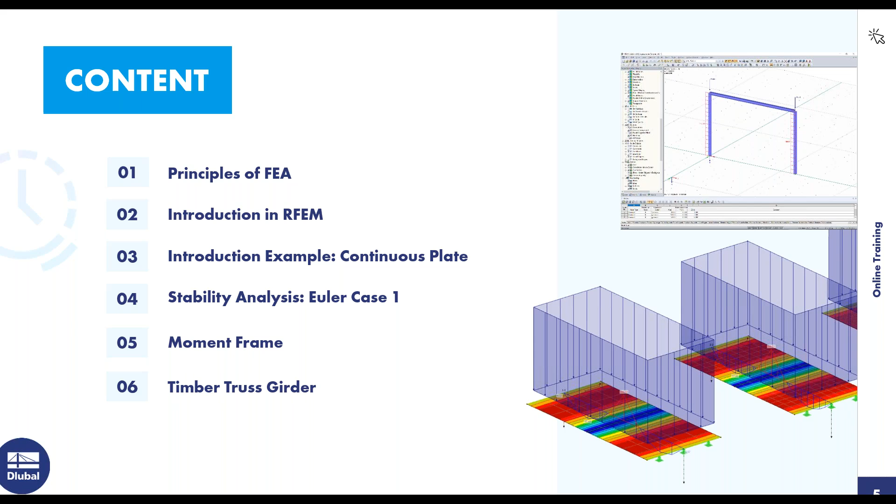With that said, we can jump into going over the basics of FEA. When using computer software, it's based on the displacement method, and another method you may be aware of is the force method, where the unknown is the force, and the internal forces can be calculated based off of this. With the displacement method, the unknown is displacement, and to solve for this, the displacement vectors must be calculated, and then the internal forces and support reactions can be figured out.

The main problem today is that analytical solutions can be difficult to determine when it comes to large, complicated structures. Doing hand calculations for some structures with complicated and odd geometry can almost feel impossible, and the limits are being reached with large, complicated structures, so it's difficult to get accurate results.

This is where FEA software comes in. Structures, especially complicated ones, are modeled and converted into a finite interconnected element mesh. The material and cross-section properties are given at each FE node, and then the mechanical behavior is transferred between these elements.

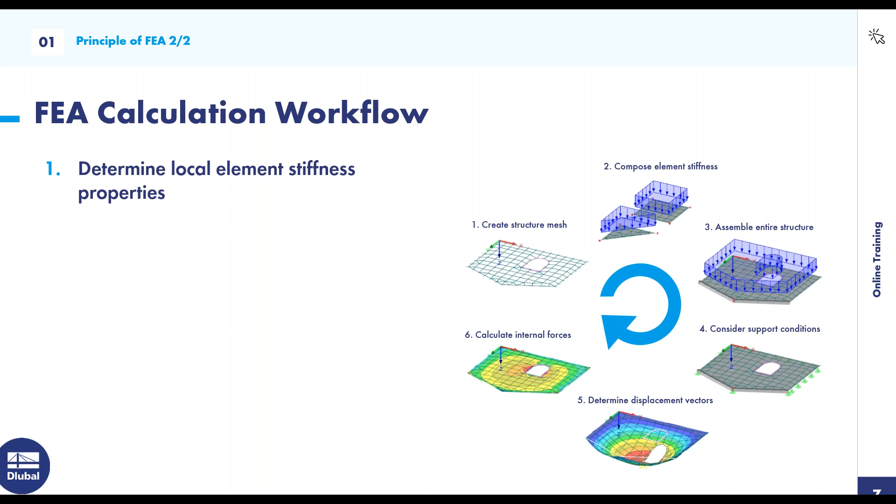Next I want to go over the FEA calculation workflow, which is also good to know for most FEA software. First, the local element stiffness properties are determined. Then those local stiffness properties are transferred to the global coordinate system, and the assembly of the entire structure takes place. The boundary conditions or supports are then defined, which could consist of sliding, rigid, or hinged. Then the displacement vectors can be calculated by solving the system of equations, and lastly the support forces and internal forces can be determined.

So the first question for today will be: what is discretization? It should be pretty easy since I just went over it, but here are the options. Choose from A to C and enter your answer in the chat, and we'll see if the majority got it correct, then go over it.

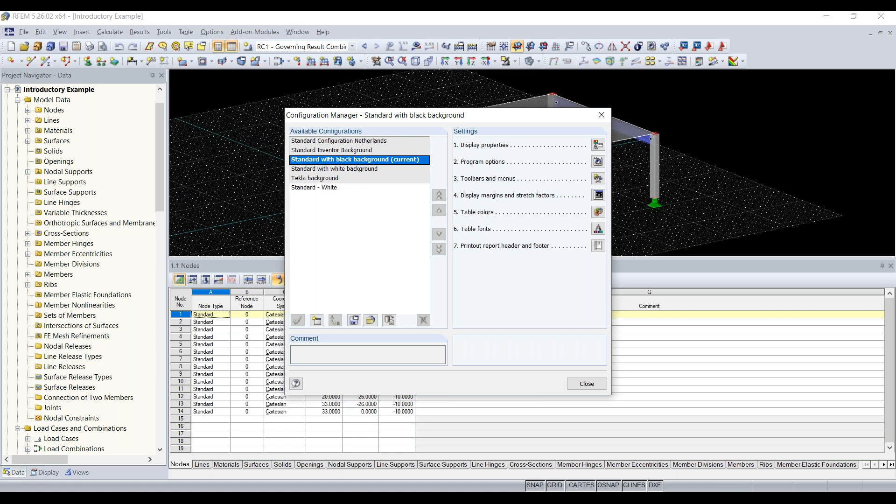Also, you can change the background color. If we wanted a black background, we could go to options, then the configuration manager, and we can change our background to black if we'd like, along with some other options as well. I'm going to keep mine white.

Then we also have the insert menu up here, which organizes all of the tools. If you wanted to insert nodes, lines, materials, or members, this is all organized in this tool table drop-down window. That's helpful if you don't want to use the tools up in your toolbar, which is the next thing to go over.

Here is all of your basic tools that you need to go through and model your model. If your toolbar doesn't look like this, you can rearrange your tools, but if you want that done automatically, you can right click anywhere in this gray space and hit reset to default, and that'll reset your toolbar to look like mine. I think this is the best layout—everything's organized where it should be, and I think it's helpful.

We can also change the view of our model using these buttons to view in the X direction, Y direction, or Z direction. There's also additional options for reverse directions as well, and you can hit this button to set it back to isometric view.

In the project navigator, if you scroll down, you have a folder for your add-on modules, and RFEM is great for checking and analyzing basic results such as deformations, internal forces, and support reactions. But if you want to get into designing specific materials such as steel, concrete, and timber, according to a standard, this is where you would choose an add-on module to do that.

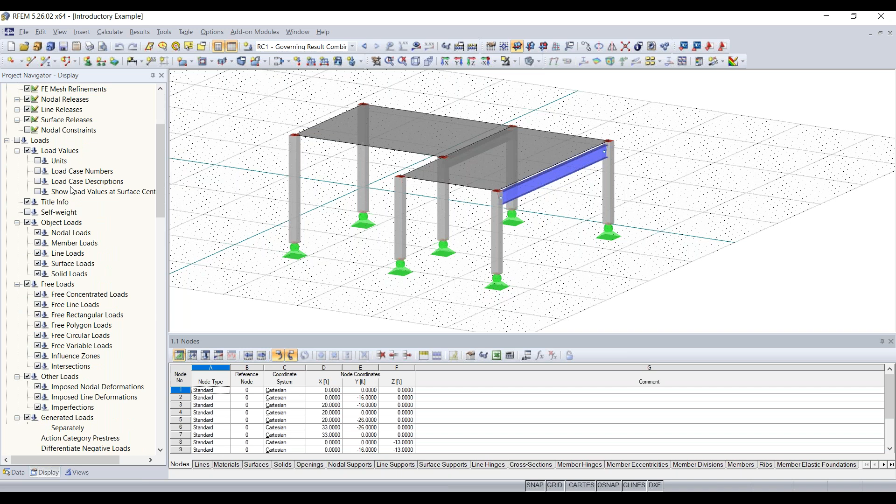We'll go over those more in depth later on, but the next tab down here in our project navigator is the display tab, and this allows you to turn off aspects in the graphical window. So if you wanted to turn off something like surfaces, this just turns off the display, it doesn't actually get rid of the surface. So these surfaces are still there, just not displayed. You can turn things on and off in here, and manipulate results and things. We'll go over this also more in detail later.

And then we have our views tab. Here we can set visibilities, and we can view things based on members by cross section. So if I only wanted to view my W18 by 50 cross sections in my model, I could do that, and you can see it grays out the whole rest of the model here, and I can easily point out my certain cross section there.

And then the fourth tab, which you can't see right now, is the results tab. So if I go up here and hit show results, and I turn off my visibilities, now we have the fourth tab here, results tab, and this is how we can choose which results we would like to show on our model. So right now I could show just my global deformations, and now you can see the global deformations graphically as well.

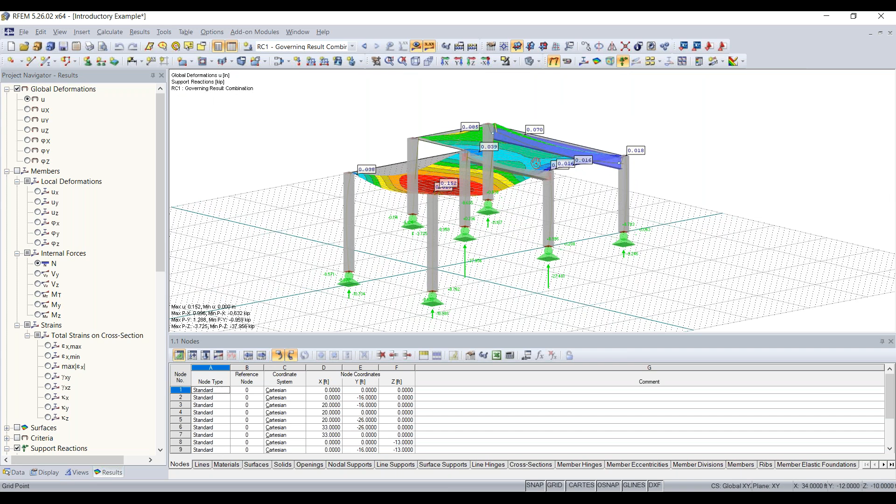So we'll go over how to view results and how to use this efficiently within the upcoming examples. Last thing to go over is just movement. So if you have a mouse with a scroll wheel, you can press in the scroll wheel and move in your model in translation. You can also use the scroll wheel to zoom in and out. And then if you hold Control and press in the scroll wheel, you can rotate your model. So those are the basic movements.

If you don't have a mouse and you're using a trackpad, you can use the keyboard arrow keys to move around. You can also hold Control and use the arrow keys to rotate. And then you can hit the plus and minus buttons to zoom in and out.

So before we get into the continuous plate example, I just would like to pose one question: what is RFEM? So if everyone wants to answer, put your answer in the chat, and then we can go over the correct answer in a minute.

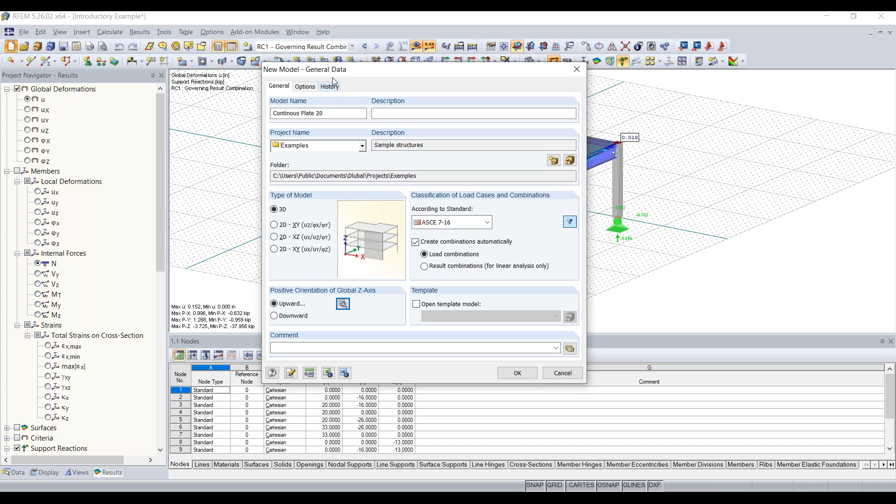So now that all of these options are chosen, we can click OK in our general data.

One other thing I'd like to mention is I'll be using imperial units for this example, but you can change between imperial and metric units pretty easily by going up to Options, then Units and Decimal Places.

If I wanted to switch from imperial units, I could open this up, and there's a button called Load Saved Profile. RFEM comes with two load saved profiles by default, metric and imperial. If I wanted to switch to metric, I would just double click on it, or if I wanted to set metric as my default, I would check off this box. For now, for this example, I'll be sticking with imperial, but just know you can switch back and forth pretty easily.

Now you can see we have our blank work window here. You can see our grid, which for imperial is 50 feet by 50 feet, and each one of these grid points is spaced one foot apart. You can go up to the settings of Work Plane / Grid to change any of these parameters. Under grid point spacing, the base and height is 1 foot, and in each direction there are 50 grid points. So my grid is 50 by 50, up in the second quadrant here.

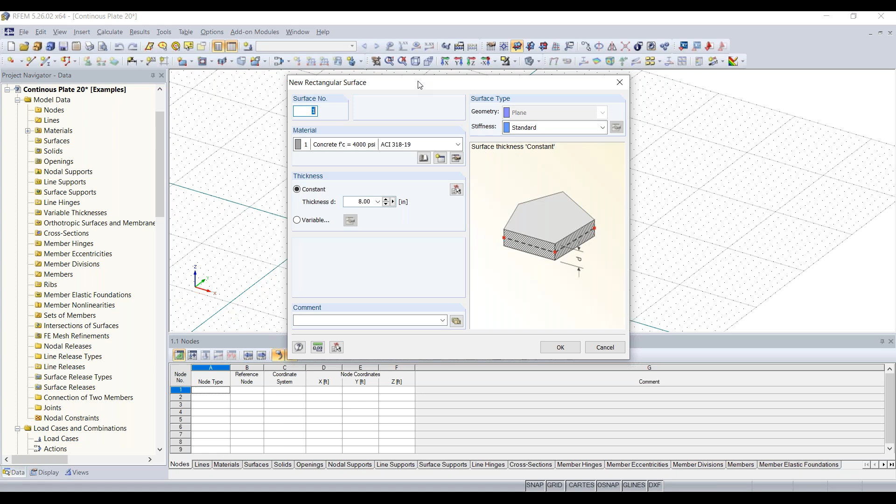So now the first thing we want to do is create one of our plates. To do that, there is a tool called New Rectangular Surface. If I click on that, this dialog box will pop up called New Rectangular Surface.

The first thing we want to do is create our material. I already have a material loaded in, but if you don't have this loaded in, you would want to create a new material. You can create your own custom material by entering the material constants, or we can choose a material from the material library that RFEM has built in.

I'll choose that, and the material library dialog box will pop up. On the left-hand side, you can filter to concrete, so for this example we'll be using concrete, then the material category. For this example, I'm going to use the ACI standard, but you can also choose from other standards to pick your material, such as the Canadian standard or Eurocode.

So I'll choose ACI, and then the 2019, the latest standard, and I want this to be 4,000 PSI concrete. At the bottom, you can also see your material constants or material properties if you'd like to check those. So I'll just hit OK.

Now the next thing we need to tell the program is what the thickness of this plate is going to be, and for this example we're going to make it 12 inches. Now everything else is basically entered, so we can click OK.

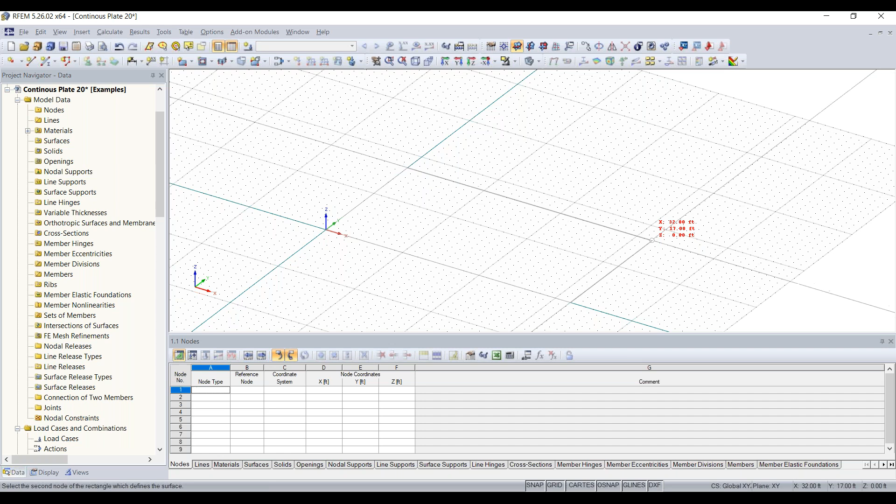You can see my cursor has turned into this reticle, so I can snap to any of these grid points to put down the first corner. The first corner is going to be located at the origin, so I'll left click on the origin, and then this plate's going to be 32 feet by 16 feet. I'll go 32, then up to 16, and click again. Now you can see our first plate has been created.

Now the next thing we can do is either just draw the same plate up at the top, or we can use the move and copy tool. I'll right click to cancel out of that tool, then highlight the whole plate. I can hold the control key down and left click to move this plate up, and I'm going to have these two plates spaced out by 5 feet.

The other option is the actual move and copy tool. If I highlight the second plate, then go up to this tool called Move and/or Copy, I can click on that and make one copy of this plate, and I want to move it in the Y direction 21 feet.

I'll click OK. Now you can see I created a second copy of the plate at 21 feet. The reason is because I wanted it spaced 5 feet from this plate here.

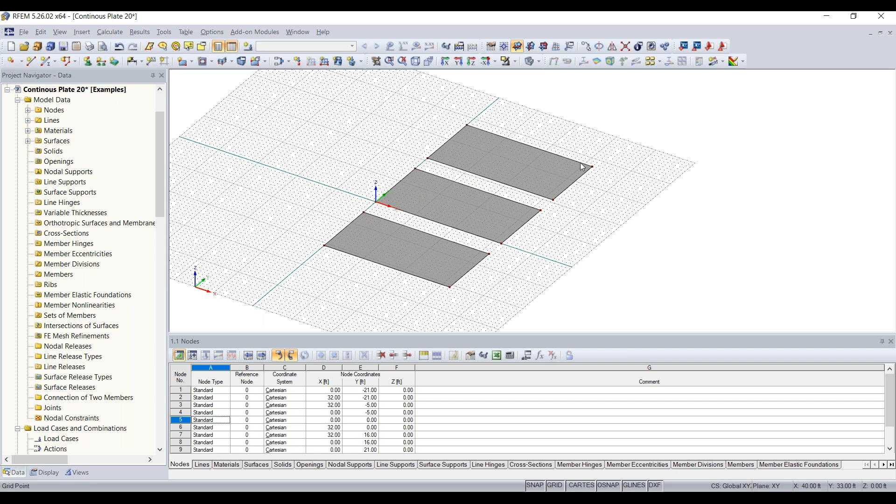So to create a continuous beam, we're going to go up here to new single member. In this new member dialog box, it looks a little similar to the one for surfaces, but it's a little more complex, as you can see.

What we want to do is tell the program what cross-section and material this member is going to be. You can see there's a member start and end—just focus on the member start, since the whole entire member will use this cross-section of material. We can click on this button here, create new cross-section.

You can enter the cross-section properties manually, just like the surface, or go up here to this button, import cross-section from library, which is what we want to do. So we'll click on that.

Now you can see we have our categories here in the cross-section library. We have our rolled cross-sections based on standardized rolled cross-sections, then our built-up sections, and then our parametric thin-walled sections.

You can change these dimensions or input them manually as you would like. Then we have parametric massive, which is what we're going to use for our concrete continuous beam, and then parametric timber, with standardized timber down here. I'll choose the rectangular section from our parametric massive category.

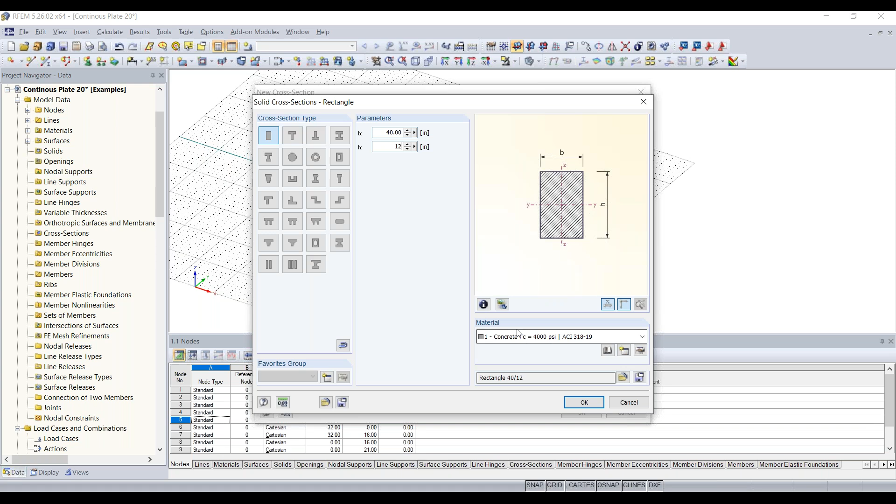The base of this is going to be 40 inches, and the height is going to be 12 inches—similar to, or exactly the same as, the thickness of our plates. The material we'll be using is the same as our plates, so 4,000 PSI concrete.

I'll click OK and click OK through all of these dialog boxes, and then I can start drawing my beam. I'm going to make this 5 feet away from the plate, like the other plates.

So I'll click for the member start, then click for the member end, and right click to cancel out. Now you can see we have our continuous beam here.

So now the next thing we want to do is divide these lines here, because we're going to add in some center supports to the midspan of our plates here. There are multiple ways of dividing lines in RFEM.

I can right click on this line, and my shortcuts menu will pop up, and I want to go to divide line. You can see there are 3 options for dividing a line. I can divide it graphically, which allows me to snap to a grid point, and I want to divide it directly in the middle at 16 feet. I could just keep going to the next lines to divide them.

But there are also a couple other options—I can divide them by an intermediate node. You can see here I can divide line by an intermediate node, and this will just divide it evenly. So if I just choose one node, it'll put a node directly in the center of that line.

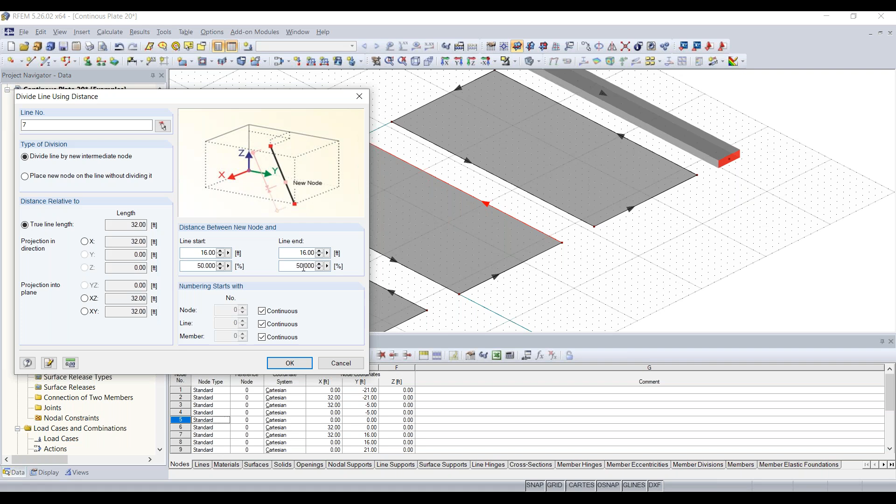And then the third option is you can do it by distance. So if you really want to get accurate on where this node is going to be, I can either do it 16 feet from the start, 16 feet from the end, or 50%, so it's in the middle. I can just hit OK.

Now it's going to put that node right in the middle. If you're ever confused about the direction you drew your lines, you can hover over them and there's an arrow telling you which way you drew your line.

This is helpful mostly for members, but also for lines if you're dividing them and not sure where the member start or end is. So I'll do the rest of these graphically, placing nodes right in the middle, then dividing my member using n intermediate nodes. We'll click OK, and now you can see my beam is divided into two sections.

Now we can add our supports. Actually, before we do that, we need to add in lines to connect these nodes. To draw a line, you can go up here to the tool called New Line, and then we can snap to our nodes that we placed here and simply go through and draw our lines.

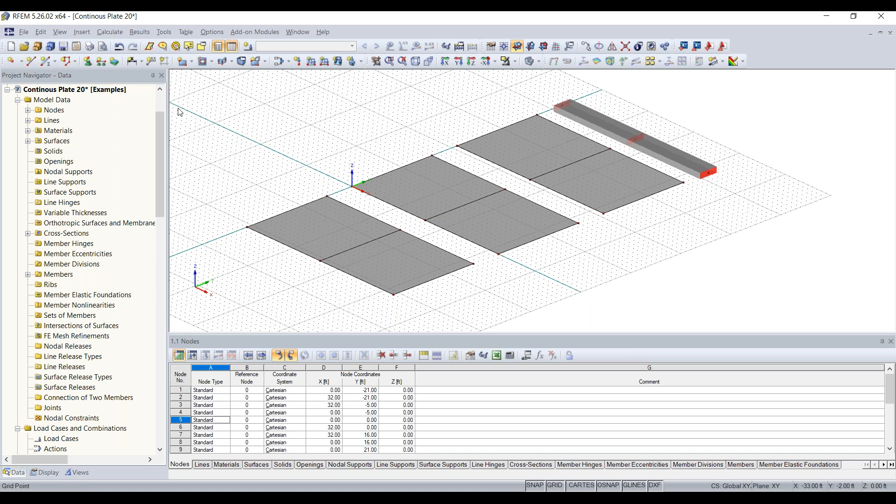Just like so, and now we can add our supports in. To create a new support, we go up here to new line support. We're going to support this center span continuously along this line, so we want to use a line support, and this line support is going to be hinged.

So nothing can move in translation, but all of the degrees of freedom for rotation are released. You can see we have templates, or already defined supports, but if you wanted to create your own custom definition, you can create a new support here, and then check or uncheck one of the degrees of freedom.

All three of these are in translation, and then we have rotation. For a hinge support, we would just check and fix all of our translation directions, and then uncheck and release all of our rotation degrees there. We'll click OK, click OK again, and now we can just select all three of our lines here.

And this is going to actually be the same for our outside surface, right there. Now we just need to support our beam here, and this is going to be supported using nodal supports.

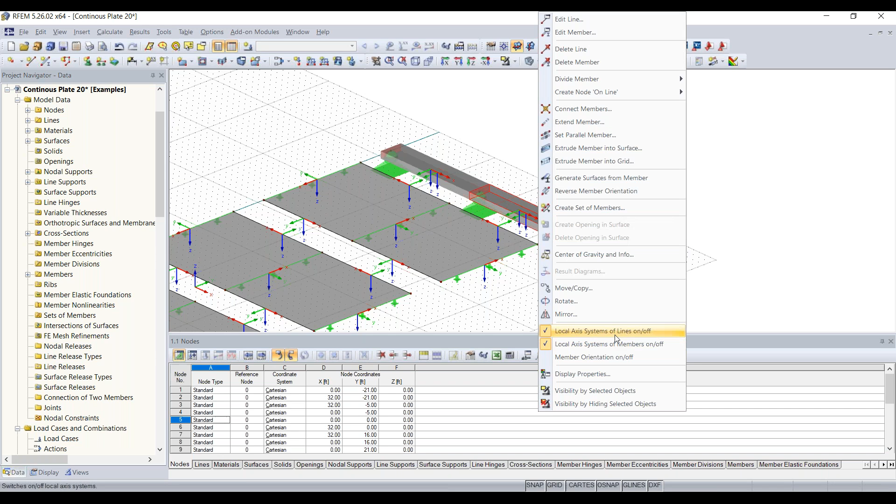So if I right click, we can show the local axis system of this beam, and that'll show the local axis system of all of the lines there. So actually I'll turn that off. Here's the local axis system of the member.

What we need to do is, if we put a third hinge support here, then the member would be able to infinitely rotate about its x-axis, and that would cause instability in the program.

So what we want to do is go up here and click on new nodal support, and create a new type of nodal support. We want to fix the rotation about the x-axis, keeping the member from rotating about it infinitely in the program. Now you can see the difference between the support with the fixed X rotation

and these two hinge supports that have it released. So now that we have all of our plates here and our beam here fixed, we can now get into loading.

Before we can add in any loading, it's important that we create a load case, because every load needs to be assigned to a load case within the program. So we go up here to this button, new load case, and this will open up our edit load case, and load cases and combinations dialog box, and you can see a load case has already been created.

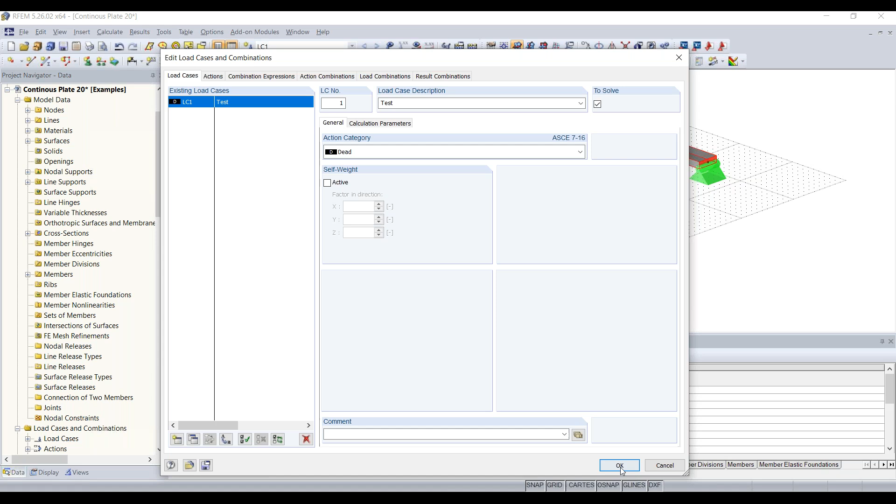We also want to note that self-weight for the dead load action category is automatically checked, so this will take self-weight into account for your model. We want to uncheck that for this example, and we'll click OK. Now you can see we're looking at our load case here, test. Any loading we add right now will be added underneath this test load case.

So now we want to create some surface loads to apply to our plates here, so we're going to go up here to the tool called new surface load.

This is the new surface load dialog box, and we want it to be a force. You can see there's multiple different load types here, load distributions. We want it to be uniform, and then we want it to act in the global Z direction for our load direction, so it'll be acting downwards. Now we just need to specify a magnitude.

For this magnitude, we need to add a negative sign, and it's going to be 210 pounds per square foot, so that'll be 0.21 KSF. Then we can click OK, and now we can just select our surfaces here and apply that loading to our surfaces. Now we can't apply that to our beam here because this is a member and not a surface.

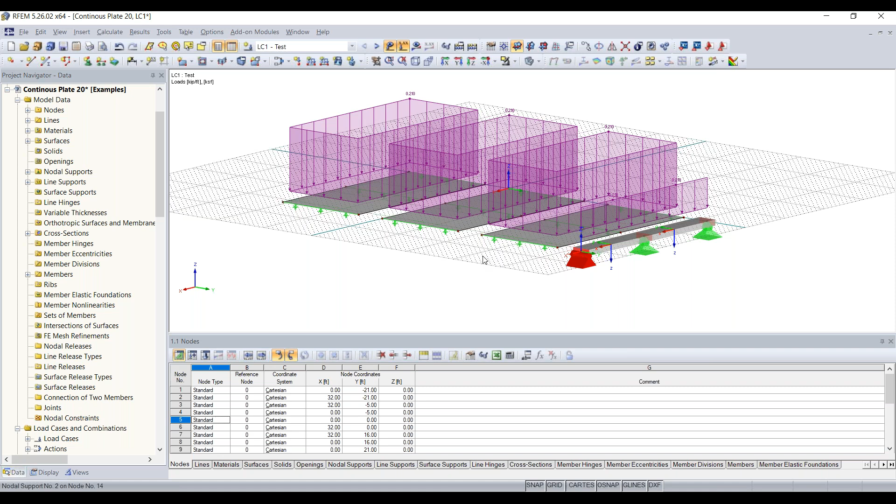Next thing we want to do is, for example purposes, create some FE mesh refinements. For now, I'm just going to unshow the loading on our model just to get a better look. To add in FE mesh refinements, we can simply right click on one of our surfaces, and there's an option here called FE mesh refinement. We want to go to new, and now we just need to create a new FE mesh refinement definition. What this does is it just allows us to specify an FE length

for a specific surface. So for this plate, we want the element length to be 0.2. We'll click OK and click OK again. And then you'll see this symbol here applied to the surface, saying that there's an FE mesh refinement here. So the whole entire surface will have an FE mesh length of 0.2 feet.

Then we're going to do kind of the same thing for this next surface. We'll right click on it, go to FE mesh refinement, and then go to new. You can see that definition I made earlier of 0.2 feet was saved, but we want to create a new definition again, and this one is going to be 0.4 feet.

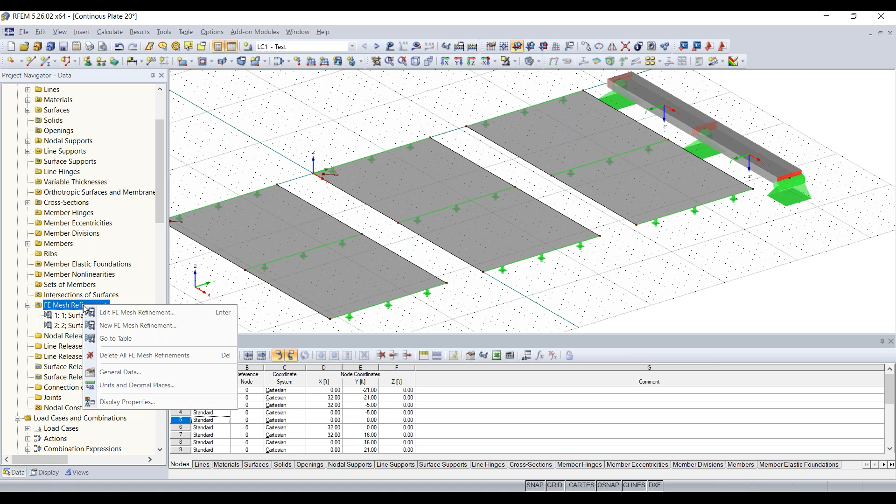Then we're going to do the exact same thing for the third one. We can also go to the project navigator, and you can see now the FE mesh refinements folder has a plus sign next to it, saying that we have some FE mesh refinements in our model. What we could do is just right click on this folder and then click on new FE mesh refinement. This third one is going to be 0.6 feet.

So you might be catching on to the reason of doing this. I've got to specify the surface up here so we can do that graphically. So I'll select that surface. What this is going to do is allow us to see the difference in results depending on the size of your FE mesh. That'll be interesting once we run our results.

Next thing we want to do is create some section cuts for our plates here. This will also just allow us to be able to view the results of the section cut right through our plate. So to create a section cut, we can go up here to Define Section and Results Diagram, and we can go to Create Section Numerically. Then the section name, I'm just going to name this one AA, and we need to choose where point A and point B of our cut will be.

We can use this button here, select edge points of the section. So I can snap to the center point of this line here, and then snap to the center point of this other side. So this will be point B.

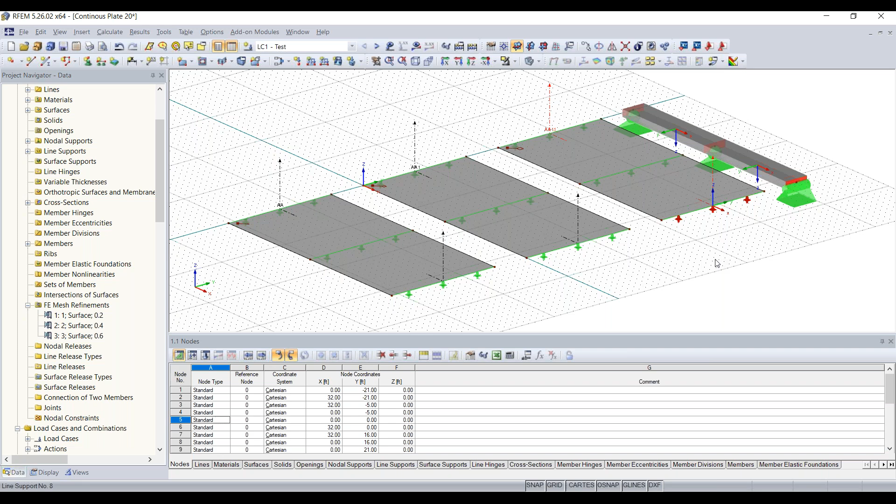You can snap to that center point again, select it again, hold Control, and then left click. And now we have section cuts on all three of our plates.

And you can see the names are a little awkward. So what we can do is go over here to the project navigator and then go to our folders and look for sections. We can expand that and double click on our section cuts here and just easily edit the name real quick. You can do that for the last one. Click OK. And now we have our section cuts.

And then now we're all ready to run our calculation. So we can either just hit show results to see the results for our LC1 here. But if we wanted to run the results for all of our load cases and combinations and everything, we can just go over here to this button called Calculate All. And what this will do is just run through the calculations, and it should be ready pretty quickly for this model.

So now you can see we have our global deformations now shown on our plates and also our beam here. Right now, it's just a yellow line showing the deformations for the beam.

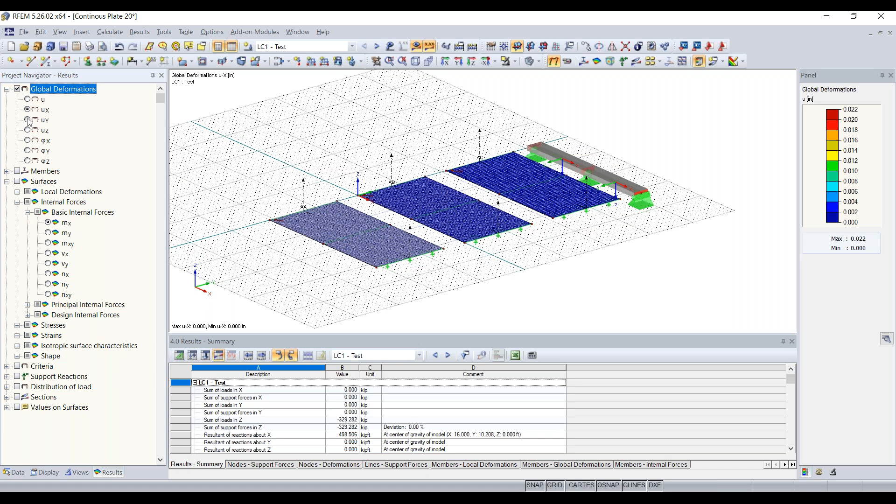And then you can see now we're in our results tab on our project navigator. So this is where we can choose what results we want to show. So right now I have global deformations checked, and that's the resultant. You can also take a look at the components in the X, Y, and Z directions as well. Right now we're getting a max deformation of 0.02 inches, so pretty minimal.

And the next thing we can look at is, for example, the internal forces of our beam here. So we'll check on that. And right now we're looking at our bending moments about the y-axis, local y-axis. So you can see that moment diagram displayed on our beam here.

I can change the rendering of our model from a solid transparent display to a wireframe view, so you can see that basically members in RFEM are just 1D member elements. So the rendering makes it look like they're 2D elements, but really they're just 1D elements in the background. But now you can get a better look at that bending moment diagram.

So we're getting a max bending moment of negative 6.7 kip feet there.

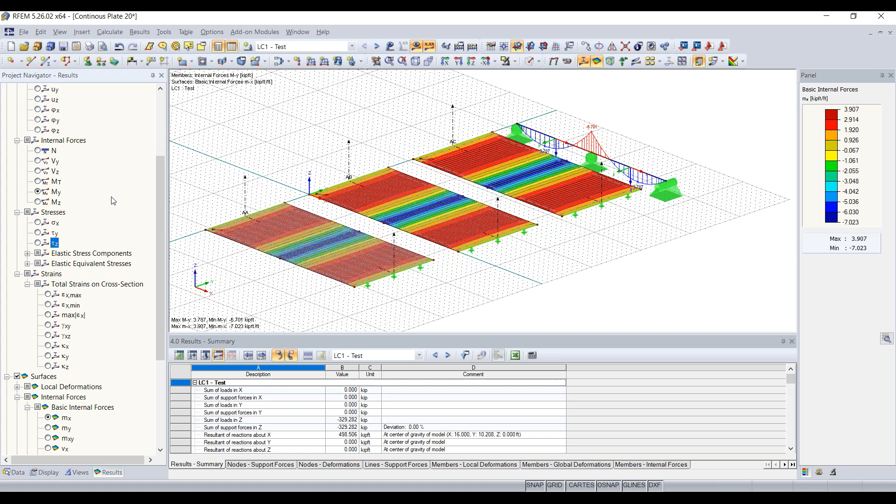Then we can also take a look at our internal forces on our plates. So if we scroll down here to check on surfaces, right now we're looking at our bending moments along the local x-axis. So every element, like I said, has a local x-axis, and this is what the lowercase x means. If you see a lowercase letter next to the symbol, that's telling you that it's using the local axes of the plate.

So if I right click on my surface, which is easier if I change this to a different one, there we go. I can go to the local axis system, and now you can see what that looks like on our plates.

And so in order to see the results better, I can also activate those on our plates. I can activate my section cuts. So if I scroll down here in the results tab, still in the results tab, everything's just expanded. But you can see we have sections now, and I can activate those.

And now you can see the results for our moments better, just with moment diagrams, basically through that section cut on our plates here. And maybe now you can also see the difference in accuracy between our plates here, depending on the FE mesh size we chose. So this first one was 0.2, and then we increased the length between all of them. So that's showing you how the results and accuracy can change.

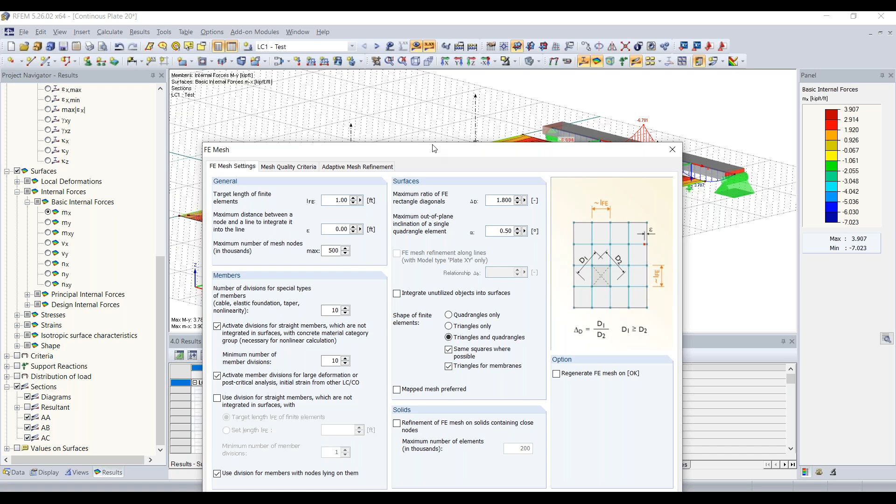Now's a good time to mention that the size you pick for your FE mesh does affect your results. If we go to calculate, then FE mesh settings, this option here, target length of finite elements, is your global FE mesh. If we didn't add refinements to these plates, 1 foot would have been the mesh size, which would have probably been too big for these plates. You can see how the results can change depending on the mesh size you choose.

Next thing I want to show you is if we go again to calculate, and then go to calculate parameters, calculation parameters.

Another topic is shear stiffness. First, I want to show you how you can deactivate the shear stiffness of your members with this option. Right now, by default, shear stiffness is activated for members, but if I uncheck this, it won't be. This is important because if you're trying to compare hand calculations to RFEM, RFEM is always running the calculations with shear stiffness considered.

Once I uncheck this and click OK, it's going to tell me I need to rerun my results because this option will change them. I'll click no real quick just to show you, but right now our max bending moment is 6.701 kip feet, so we'll see it shouldn't change too much. If I hit OK, delete the results, and rerun them, you'll see some change in results. We were at 6.701, and now our bending moment increased a little to 6.72. Nothing too large, but this is important to keep in mind if you're comparing hand calcs.

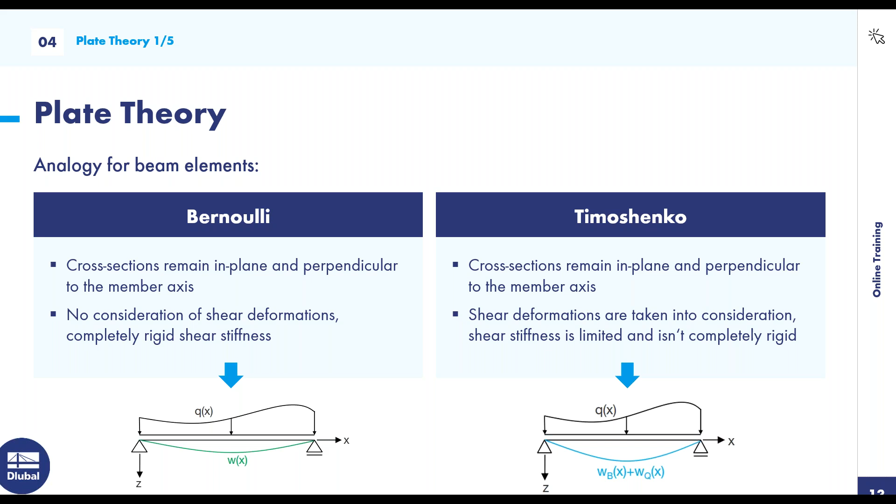You can see here that the deformation for Bernoulli's looks like this and is perpendicular to the member axes, whereas with the Timoshenko theory, we have an additional angle. This leads to additional deformations, due to the shear deformations taking into account that the shear stiffness is not completely rigid and changes.

Now, knowing these two theories, we can apply the same idea to our plate elements, or plate theory. A similar theory to Bernoulli's for plate theory is Kirchhoff's theory, and similar to the Timoshenko theory is the Reissner-Mindlin theory, which works the same way for plates.

The assumptions for the Kirchhoff theory are listed here. We're assuming small deformations that are linear. We're also assuming the material used is linear elastic, using Hooke's law. We're assuming the cross sections remain flat with no warping, and that the plate has constant thickness. The major assumption is that there's no consideration of shear deformations.

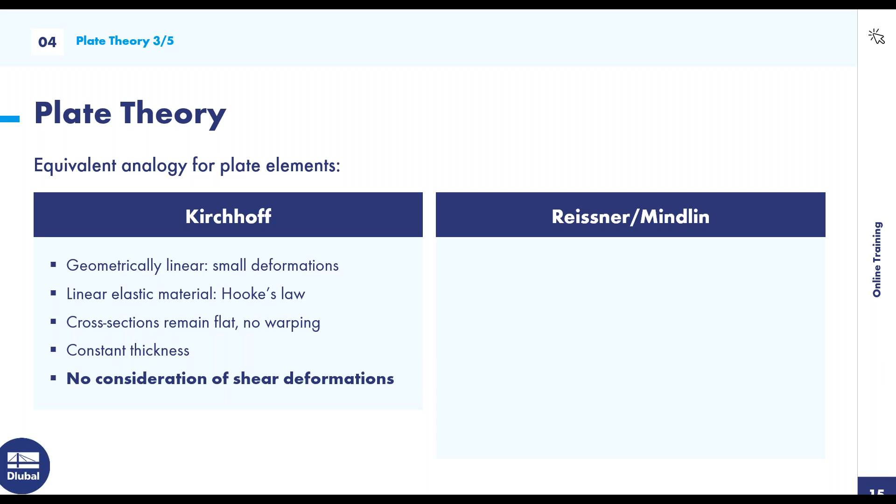For the Reissner-Mindlin theory, we assume all of the same assumptions, except that shear deformations are considered, and we're also taking into consideration transverse/lateral strains.

So again, we have our two plate theories, the Kirchhoff theory and the Reissner-Mindlin theory. Just to summarize, the Kirchhoff theory has great results when using thin plates. For example, concrete slabs work great. Again, no consideration of shear deformations, and keep in mind that this theory only considers a pure bending loading bearing capacity. So this is just more of a simplified approach. Keep that in mind when using the Kirchhoff theory.

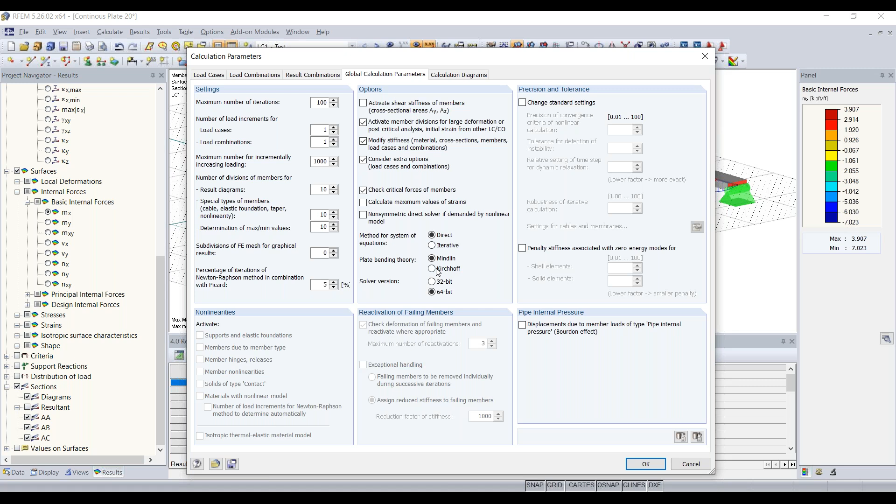So now we have our plates here, and if we go up here to calculate and we go to calculation parameters, you will see under calculation parameters that we have our plate bending theories down here. By default, RFEM uses the Reissner-Mindlin theory, which, like I said, works great for both thin and thick plates and just produces more accurate results. So if you wanted to use the Kirchhoff theory, you can switch to that.

So if we switch to that, right now you can hopefully see these results. So about 6.592, we'll just keep an eye on this one, 6.594. If we change this and we click OK, it's going to ask us to recalculate. If we run this calculation again, we should see that our bending moments will increase from the decreased deformation. So yep, 6.6. It was about 6.59. So not much change in results, but still just increased accurate results there with the Reissner-Mindlin theory.

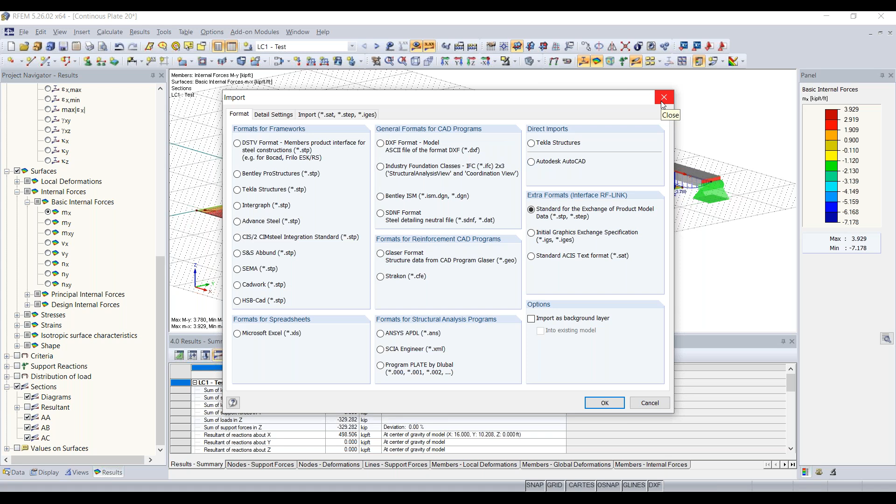The only other question I'll reiterate is the topic of setting the local z-axis down - it was asked why we need to do this. For local axes, you can have it set to upward, but we always recommend setting it to downward because this is how some of our add-on modules work. For example, the concrete module is mostly designed and based on having the local z-axis set to downward. When you set it upward for modules like the concrete module, your results could look inaccurate. So having this set to downward is important.

I also mentioned in the questions dialog box that this will be addressed in a future version of RFEM where this will no longer be an issue - you'll be able to use either the local axis Z up or down.

A few more questions that came in. Does RFEM produce shop drawings? The answer is no. It is purely for structural analysis only. It does not produce any drawings meant for fabricators.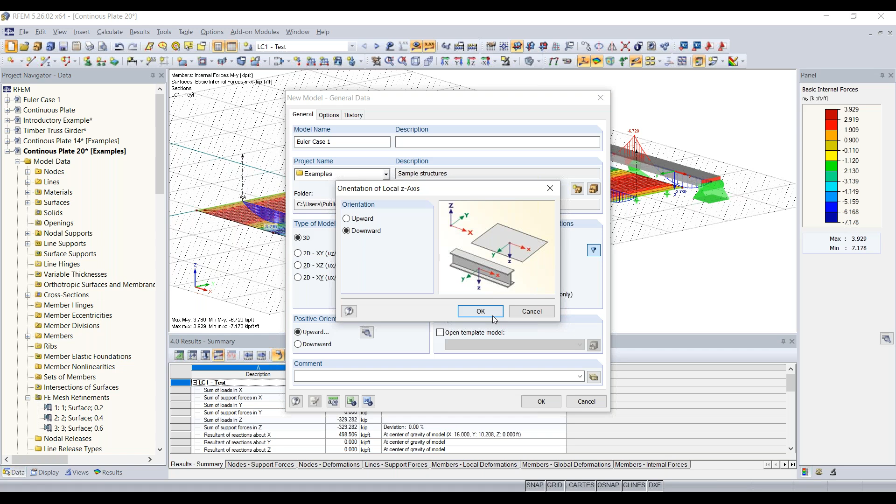Now for this example, we'll be creating a new model. We'll go up here to new model, and the name of this will be Euler case 1. Everything else will stay the same, it's going to be a 3D model. We'll just keep our load cases and combinations created automatically. Everything is set, so we'll hit OK.

So now again, we have our blank grid here. The first thing we want to do is create a new cross section, so we can go up here to new single member. We'll use the cross section library, and this is going to be a W shape. We'll filter to the AISC and the manufacturer, then choose W shape, and this is going to be a W shape 12 by 35.

We'll scroll down here to 12 by 35. We don't want it made out of concrete, so we can go to import material from material library. It'll be metal, steel, and we'll use the ASTM for this example, and we'll just make it steel A992. Click OK, and then click OK again, and click OK one more time.

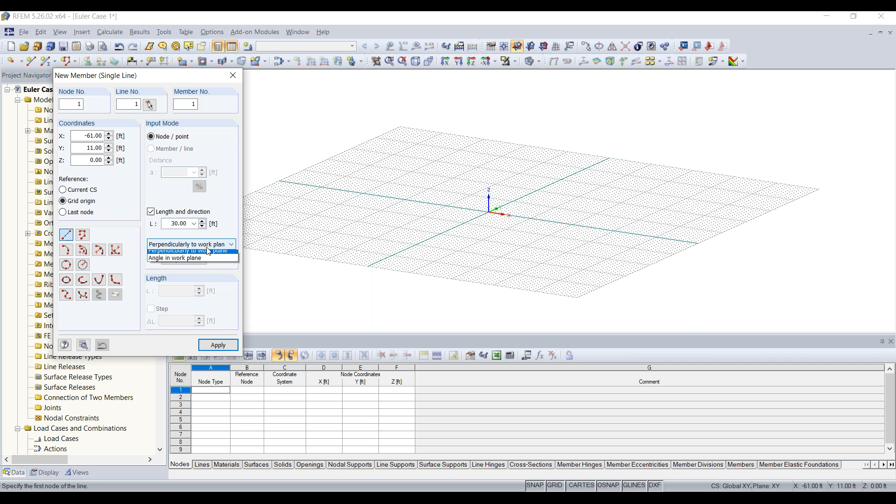This is going to be a 30-foot tall column, and we basically want to draw this member perpendicular to our plane here. So a couple options for that. We can either choose the option in this tool here, length and direction, type in 30 feet and select perpendicular to work plane in the positive direction. Now I can just draw this, select the origin here, and the program will draw that member 30 feet perpendicular to our grid. The other option would have been

to change our work plane. We can do that up here with these three options. Right now the work plane is in the XY plane, but we could have drawn our member up the plane there, and you can see again it's 30 feet tall. So we'll just change our grid back to the XY plane.

Next thing we want to do is support this column. We'll just highlight from left to right to only select the node down here at the bottom, then go up here to new nodal support. We want this nodal support to be a completely rigid support, so all 6 degrees of freedom are fixed. We'll click OK, and now we have our column framing into the support.

Basically this is our model. So what we want to do now is create a new load case. We'll go up here to new load case and we'll name it test, just like we did in the previous model. We'll turn off self-weight, deactivate that, and then we can click OK.

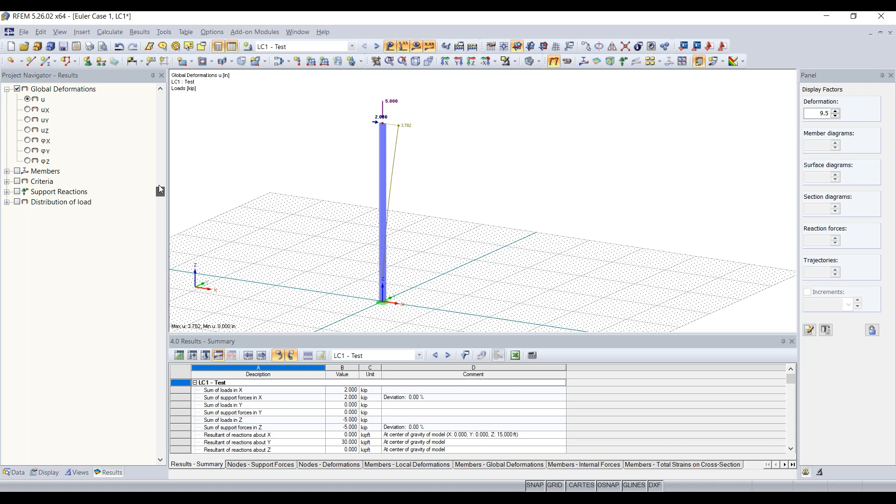Next thing I want to do is show you something very important, so I'll hit calculate, and then we can take a look at our deformations. If we look at this column from our side view, you can see it's deforming in the X direction. If we go to display, under results, under deformations, and under members, we can choose colored sections, or cross sections colored. Now you can see the cross section here that's deformed, and we're getting a max deformation of 3.78 inches.

Then we can also take a look at our internal forces. I'll check on members, and then under internal forces here, I can show the bending moment about the y-axis. You can see at the bottom here is where we're getting our max bending moment of -60 kip feet. So we're getting a max moment of 60 kip feet at the bottom and a max deformation in the X direction of 3.782 inches. Keep that in mind.

Now I want to show you how this linear or first order calculation differs from a second order calculation. So what I'm going to do is open up the load cases and combinations box.

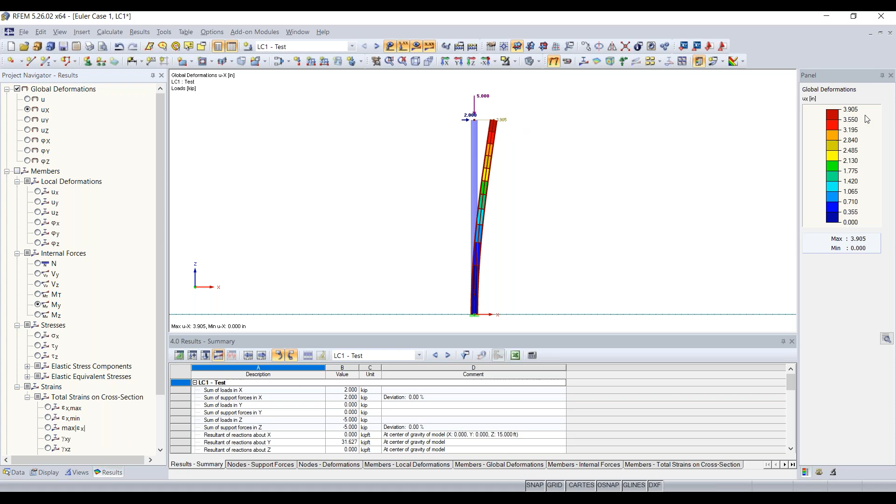You should see that the deformations and bending moment will increase, and this is because of the P-delta effect. Now you can see we're getting a max deformation of 3.9 inches, which will in turn increase our max bending moment to 61.6 kip feet, based mostly on that increased moment arm, so we'll get an increased moment. Keep this in mind when looking at load cases and load combinations, where results can change depending on whether a first or second order analysis is run.

Another quick note is that members in RFEM are determined to be either a beam or column based on how the loads are applied. In this case, we have a column here, mostly because of the axial force applied to it. So even though if we double click on this member, the member type is set to beam, that's just the member type you use whether you're modeling a beam or a column. It all just depends on the internal forces within the member.

For the next topic, I'm going to change the loads here at the top to only be in the axial direction, changing the axial load to 0.1 kips, so 100 pounds, and then changing our lateral load here to 0. Once I do that, I'll click OK. I actually need to switch the direction, so I'm going to double click on this load and change the sign of this, so it's a gravity load.

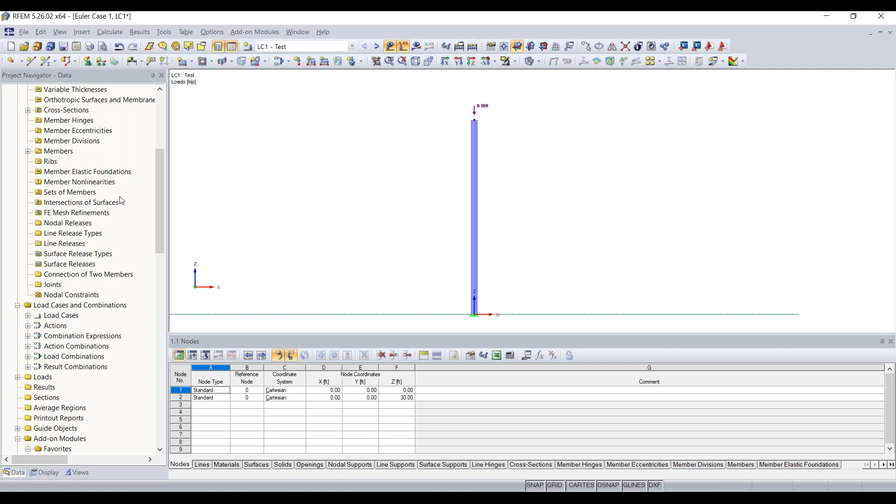Next thing we're going to do is get into one of the add-on modules, and that is the RF Stability add-on module. All students have access to all modules, so you should have access to the RF Stability module. With the help of eigenvalues and different eigenforms, we perform a stability analysis on this column.

To access that, we can either scroll down here to the add-on modules folder and look for RF Stability. I have it saved up here in my favorites folder, or you can also go up here to add-on modules, then go to stability, and then RF Stability. You'll see the RF Stability add-on module open up, which is basically just a dialog box within RFEM.

Just some quick background on stability analysis: Euler was a mathematician who came up with different cases to show the critical loads, as well as critical load factors and critical lengths. This is something every stability analysis does, and it's important, when using this module, to activate the division of straight members. You can see that's activated by default already.

You can edit the options for this. If we go to edit FE mesh settings, we can go down here to the minimum number of member divisions and change this from 2 to 10. What this does is just increase the accuracy of your results. So we'll click OK, and that's basically everything we need to change.

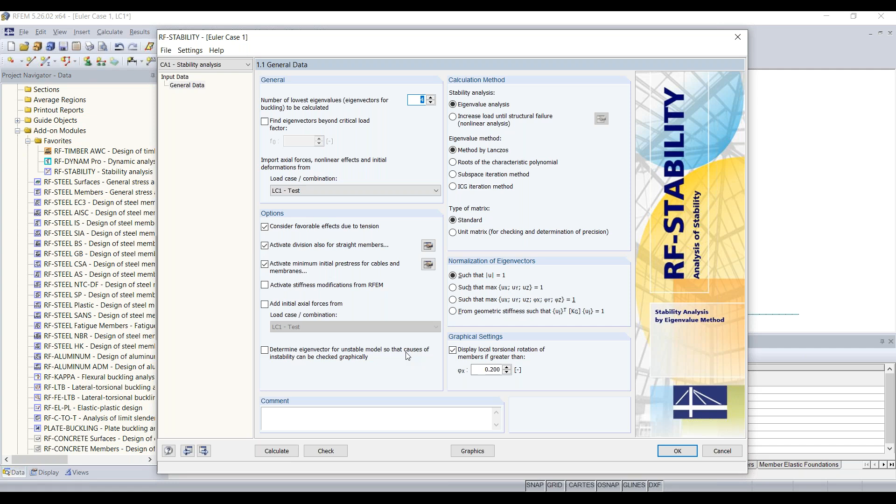So we're running this stability analysis based on our load case 1 here, and the number of lowest eigenvalues we're showing is 4. That's also by default, and everything else we really don't need to worry about. So we can hit calculate.

Once the calculation is done running, we have our results here, and we can take a look at our critical load factors for each of our eigenmodes. Our critical load factor for this first eigenmode is 135.

The critical load factor is the amount you would have to multiply your loads by in order to get an unstable system. Or it can be looked at as the total percent of the loads your structure can take. It's important to keep in mind that if this number is under 1, your structure can't handle 100% of the loading applied to it.

So I have only 100 pounds applied to this column. Let's say this number was under 1, like 0.9 — then my column would only be able to handle 90 pounds, and anything exceeding that would cause an instability. That's the basic understanding of the critical load factor here.

Next we have our effective lengths. We can take a look at our effective lengths for our member here for each eigenvector, and we can also take a look at the critical load here.

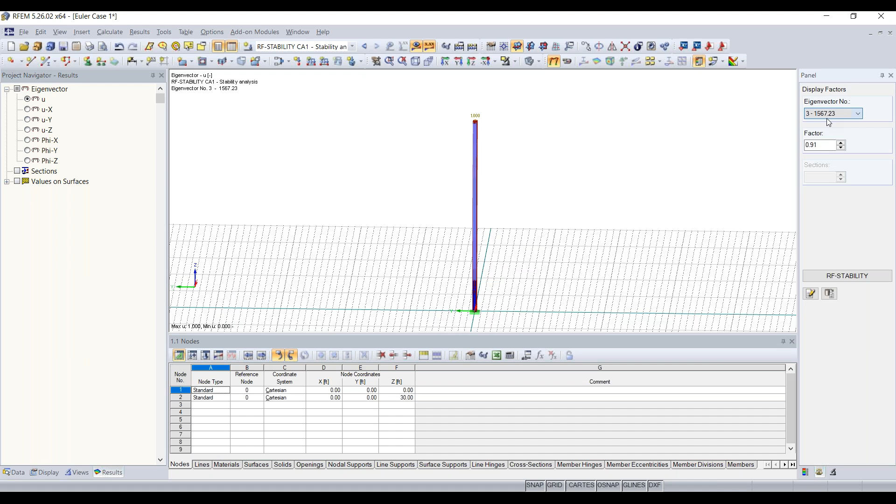Under the factors tab, you can see the eigenvector number. Right now we're looking at 1, but we can change this to 2, 3, and then take a look at our fourth eigenmode.

You can notice that the weak axis of this column is in the y direction, about the local z-axis. That's mostly the reason for this — the column is deforming in this direction because of the weak axis, and the moment of inertia in this direction, or about the local z-axis, is smallest.

If I double click on the column, we can take a look at the info about our cross section, and you can see that the moment of inertia about our local z-axis is 24 compared to 285. So this is the reason why the column is buckling about this axis.

So now we can swap back to RF Stability. You can see we have it selected under our dropdown up here. What I can do is just hit this button right here, RF Stability, and then we can take a look again at our effective length factors.

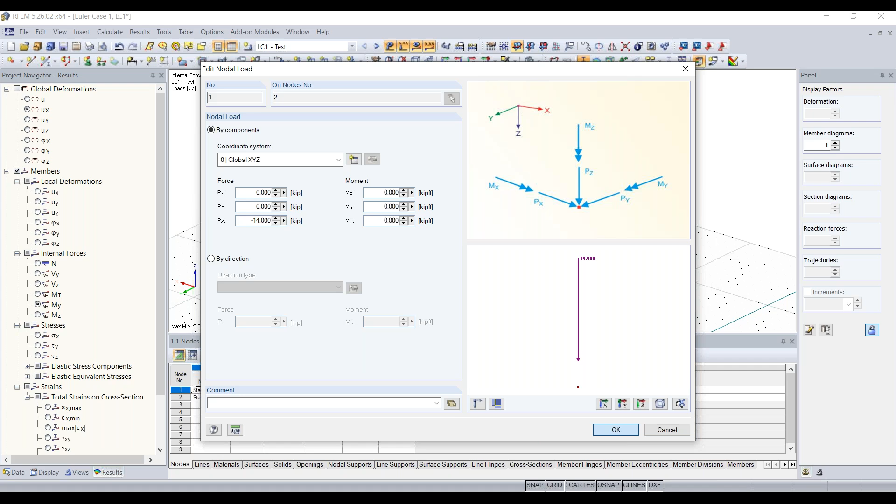Before we run our stability analysis, we already know that this structure is unstable. If you have an unstable structure, you need to make sure you are not running a second order analysis, because then RF Stability will not be able to show you the critical load factors. So we'll go back into our calculation parameters and turn this back into a linear analysis.

Then we'll go back into RF Stability and hit calculate. Once this is done, you should see we get a critical load factor below 1 — we now have a critical load factor of 0.966. This factor being under 1 tells us that our structure cannot take 100% of the 14 kips that we applied to it.

So that's one way, if you have a structure and you're getting an instability and you made sure everything's connected and modeled correctly, to tell if you need to maybe optimize some of your model.

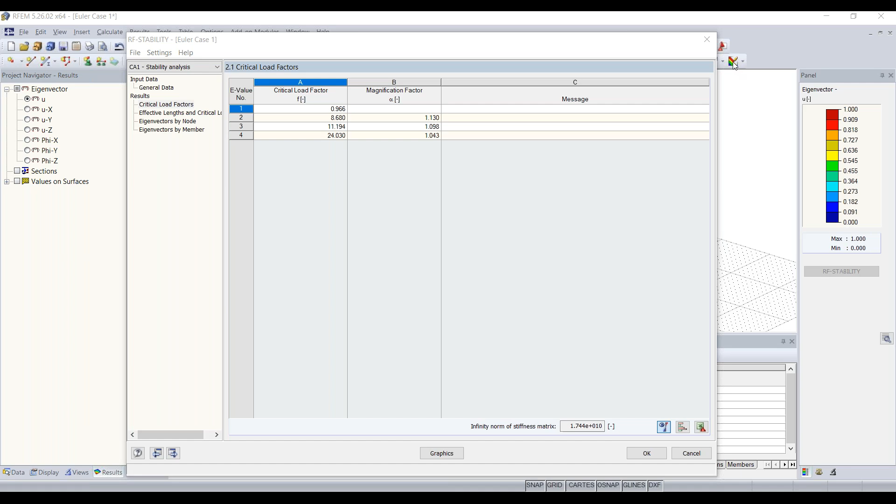And what we can do now is start creating our moment frame, so we're going to turn this column into a moment frame basically. To do that, we can change our force here back to -5 kips, and we won't add any lateral loading.

Then we can take this column and highlight the whole thing, hold Control and select one of the nodes, and make another copy 10 feet away. Then we can highlight these top nodes, change my work plane back to the XZ plane, and simply highlight both of the nodes here from left to right to only select the nodes. Then I can left click and drag these down to about 10 feet. Now we have our columns for our frame.

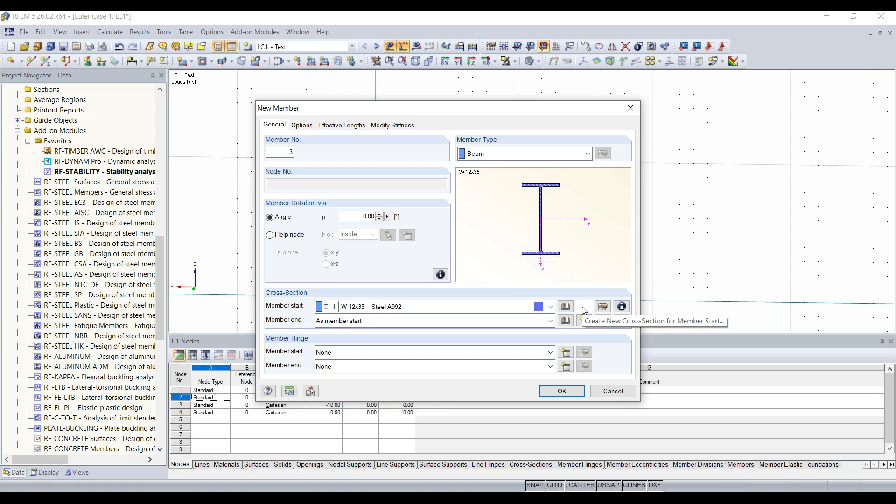Now we want to create the beam for the top of our frame, so we'll go up to the create new member tool. The beam connecting these two is going to need a new cross section, so we'll go to W sections. This beam is going to be an 8x15, so we'll scroll down and make it steel A992, so that's okay. Click OK, and then we can connect both of these columns like so with our beam. And now we have our moment frame.

So what we can do, just to make this a little more interesting, is add in a new member load. This new member load is going to be -3 kip per feet, a uniform force in the global z-axis direction. We'll click OK, and then add in our loading there onto the top of our beam.

Then we can run our calculation, so I'll just say calculate all, and then check out the internal forces and critical load factors. Now you can see we have our moments here along with our deformation.

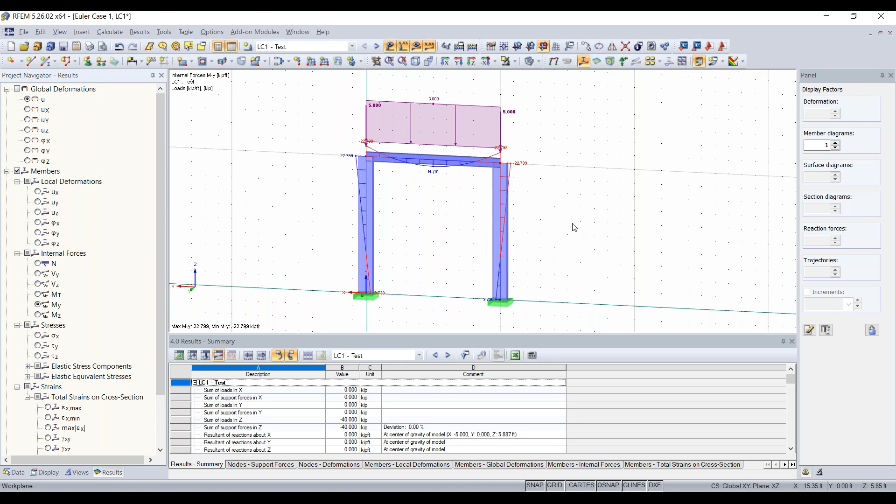Since we hit calculate all, we can go to our stability and take a look at the stability analysis that ran. Right now we're looking at our first eigenmode here, which is 4.89, so that's great, stable. Then we can scroll through and look at our other eigenmodes. Basically you can see that this frame is bending out of plane, which is not ideal. I can increase that by a factor to exaggerate it a little bit, so now we can see what the major issue is. If we had too high of a load, this is something we'd want to consider.

So we can add in some supports here to keep this from bending out of plane. If I hold Control and select both of the nodes here, I can add in some nodal supports, create a new nodal support, and change my degrees of freedom here to only support it in the Y direction, to keep it in plane. So everything else, it can move up and down, left and right, it can rotate, but it just can't move in and out of the plane. We'll click OK, and now we have these supports up here at the corners.

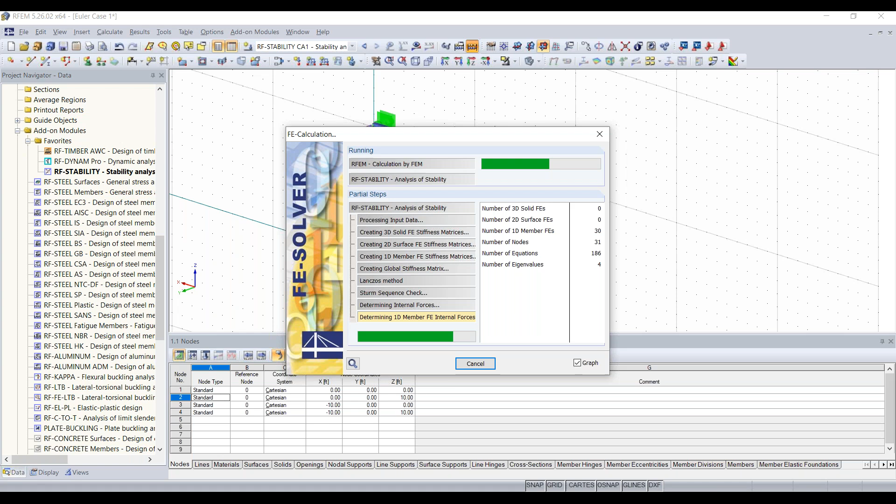And if we rerun our calculation, we should see some better looking eigenmodes. Yep, so our first eigenmode or critical load factor increased from 4 to 21, so that's looking good, and we have no bending out of plane for our frame here. Again, you can scroll through and take a look at the other modes. Also, you can take a look at the support reactions, something else I didn't show. Yeah, so we have our support reactions here.

So that's basically the moment frame. Now we can move on and get into the next example, which is the timber truss girder. This example will basically just be modeling this truss and then loading it, supporting it, and then I can show you how to design these members, and we'll be doing that based on the AWC standard. So let's hop into it.

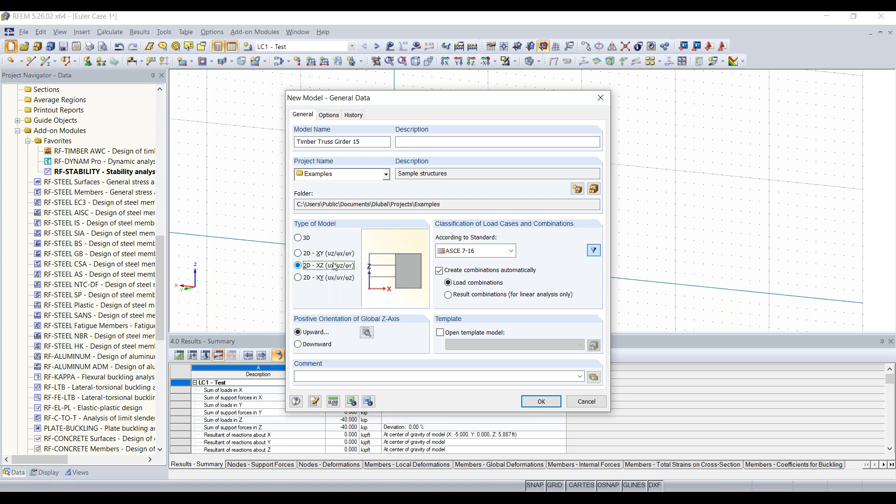Then we want to activate the combinations, set them to automatically. For this, we're using wood, so we want to use the ASCE 7-16 and the NDS. That's just for this example, but you can also use other standards for wood, like the Euro code or the Canadian code. And we'll click OK.

To start, we have again our blank grid here. You can see since this is only a 2D model, we can only keep our grid in the XZ plane. Can't move it in and out of the plane here.

There's plenty of ways that we could go about modeling this truss. We could draw our members manually and measure them out and everything, or we can use a tool that RFEM has built in for creating truss systems.

If we go up here to tools, and then we go to generate model members, you can see we have a couple of options for generating different models like 2D frames, tapered 2D frames. The tool we're interested in for modeling this truss is 2D truss.

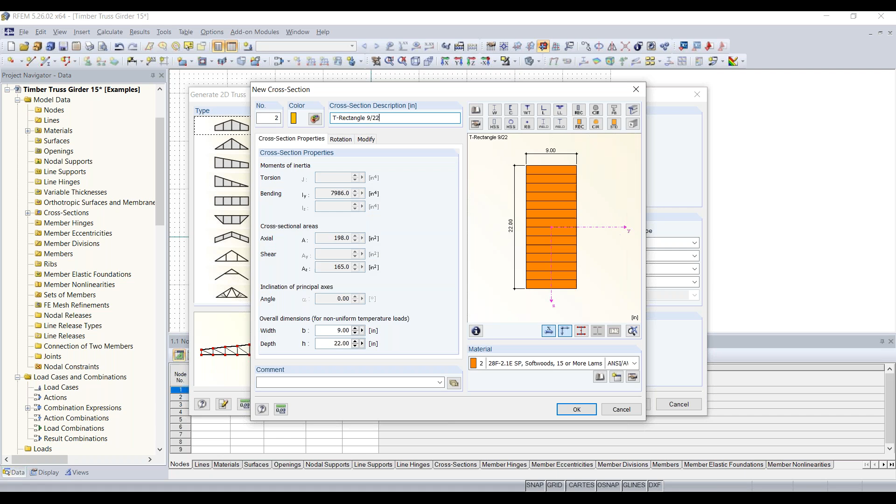Now what I can do is the same thing basically for the lower chord, but I'm going to create a new cross-section, and then I can simply hit Control-V and copy that cross-section description into the box up here and change my material. Then for this lower chord, I just want to change it from 9 by 20 inches to 9 by 22 inches, just to increase the depth, and hit OK again.

For the diagonals, it's the same procedure, but for this one we're going to change our dimensions from 9 to 8, and then from 22 to 8, so our diagonals are going to be squares, 8 by 8. And we're going to change the material again.

Lastly, we'll create a new cross section for our verticals, and they're going to be a little different from our square diagonals—they'll be 8 by 4. And then change the material again.

So now we have all of our cross sections defined. We also have member types defined here. For the upper and lower chord, we have beam type selected, and you'll see for the diagonals and verticals, they are truss types. The difference between a beam member type and a truss member type is that a beam has fully fixed connections and all 6 degrees of freedom.

So the translation and rotation is all fixed, meaning moments will be transferred between connections. But for a truss type, this is a pin connection, so rotation is allowed, meaning there will be no moments transferred between or through connections to other members for trusses.

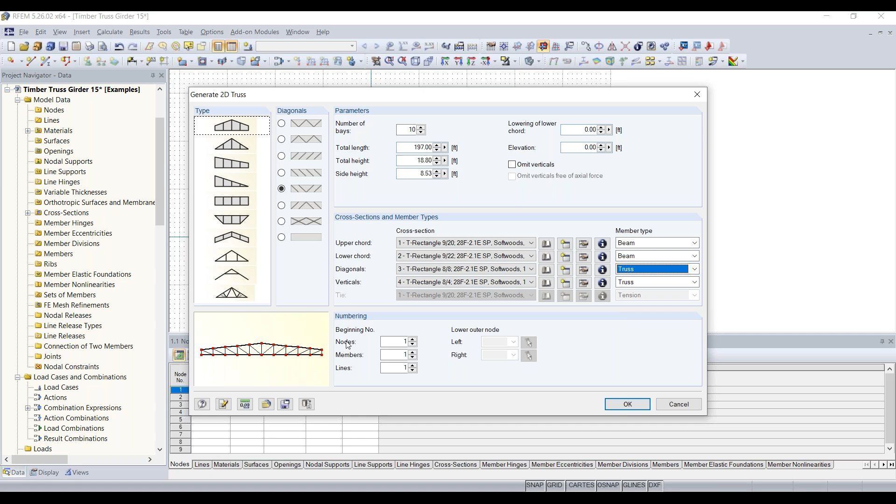Next, we can basically just click OK, and you can see that our truss has generated. So you can see all of our member types are created.

One thing I do want to actually change is the verticals. We should probably increase the cross section of them. They are looking a little slim, so what we can do is simply go to cross sections, double click on our 8 by 4 cross section here, and change this to a depth of 6, and then we should have an increased cross section there.

The next thing we want to do is delete the bottom left and right members, because we're going to support our truss at the ends of the upper chords here. So what we can do is hold Control and select these bottom left and bottom right hand members here, delete them, and then delete the lines there as well.

The next important thing we want to do is make our outer diagonal members beam types, because if we leave them as truss members, which they are right now, there will be no bending moments transferred between the bottom and top chords. So I'm going to hold Control, select both of them, double click on them, and go up here to member type and change that to beam.

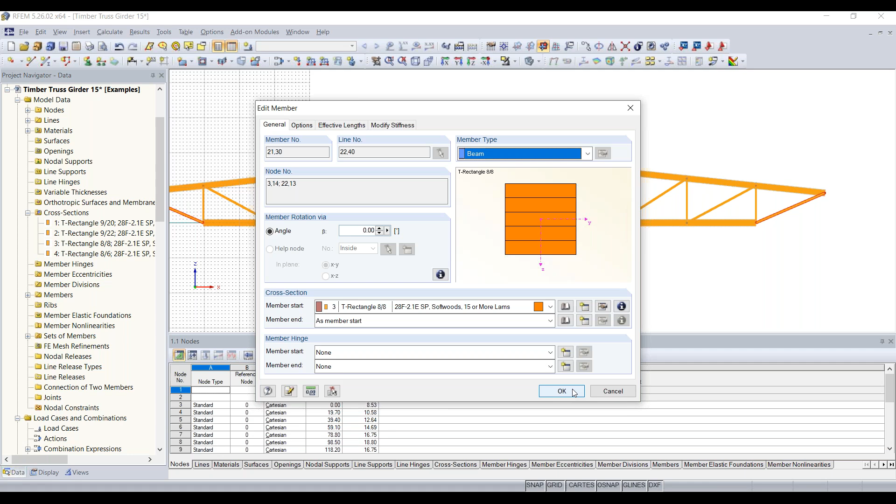So this is a good visual. If I have them set to truss, you can see the member hinge is grayed out, meaning they're pin connections and we can't choose the member hinge for a truss member. But if I choose beam type, then you can see that the member hinges are available to be customized. So we'll click OK.

And then we also want to make sure these members are included in our set of members. A set of members in RFEM is basically multiple members all combined into a set of members. So if I change my rendering to wireframe and zoom in, you can see my top chord here has a dotted line around all of the members up here, showing that these are all within a set of members. A set of members allows you to easily show the results for all of these beam segments as one large member, which allows you to view the results easier.

It also allows you to apply loading easier, and allows you to run designs, designing all of these members as one long continuous member. So you can see that the top chord has its own set of members, and the bottom chord is also a set of members. But what we want to do is note that these diagonals are not part of the bottom chord set of members.

So we can simply double click on this dotted line here, and this will open up the edit set of members dialog box. You can see this number, the second set of members lower is defined as the lower chord, and members 12 through 19 are included here, but we want to include the diagonals. So I can select them graphically, click OK, and then click OK again, and now you can see my diagonals are part of my bottom chord here.

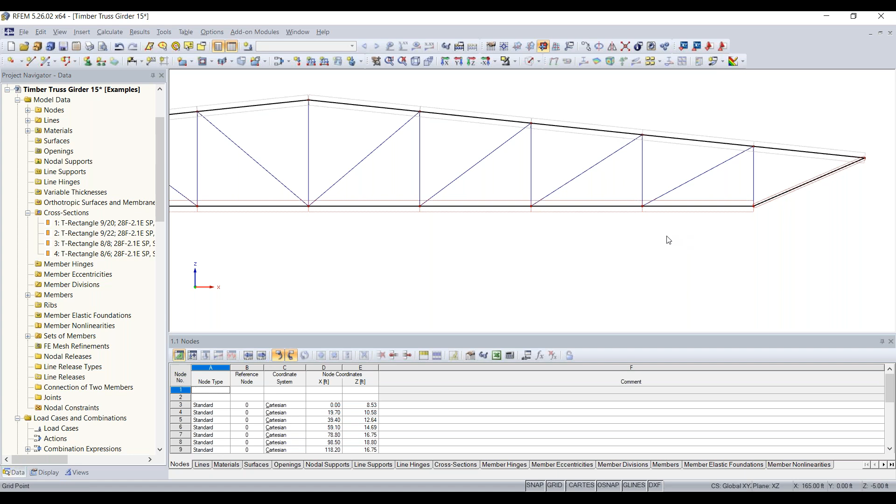Now we can add in the supports for this truss. We can go up here to new nodal support, and for the left side support, this is going to be a hinge support. So what we want to do is choose hinged, and you can see there's no rotation about the y-axis because this is just a 2D model. So I'll add in that hinge support on the left-hand side.

And then for the right-hand side, we're going to add in a hinge support, but this one is going to be different. We're going to allow it to be a rolling support, able to slide in the X direction, so we can release that. Basically this one's only supporting the frame in the vertical direction, and it also can't move in and out of the plane.

So we'll choose that corner, and then I can right click to exit out of that. Also, you can see my truss is basically outside of my grid here.

What we can do is have the grid automatically adjust to the size of our model. To do that, we go up here to the settings of work plane, and there's an option called dynamically. For the number of grid points, we can have this set dynamically according to the size of model. If we check that option and hit OK, now you can see our grid has automatically adjusted to the size of our model.

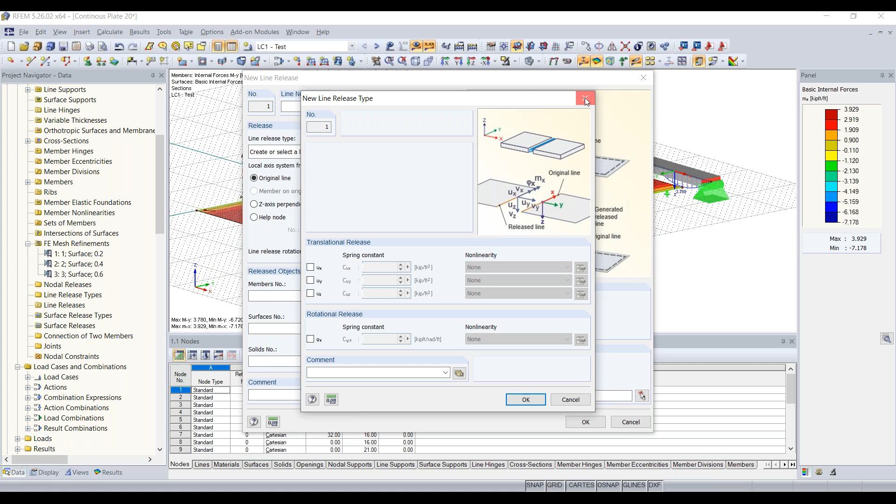Basically what you would do is choose the line which you're releasing graphically, and then you can define the release. So since you wanted to release the moments, you go down here to rotational release and activate that, and then only the moments between that line and the surface would be released, or your beam. Then you would have to just choose or tell the program what surface that beam is being released from, and then that's basically it. So that's kind of the basics of how to use this line release tool to release the moments between a beam and a surface.

So now I can right click and I could even uncheck show hidden objects in the background. Oops, so maybe I did that wrong. I think you just didn't have the 3 members displayed when you created that visibility. Oh yeah, that might be it - okay, let's try that again. So turn off - oh.

Yeah, so, or I guess the better way to do this would be visibility by window, and then we could select those members and then create a new visibility, and then that would be your story 1.

And now you could turn off show hidden objects in the background, so that would be your story 1. Then every time you could create multiple stories, and then all you'd have to do is go to your user-defined view and check on which story you want to see. And then, yeah, that's fine.

I think that's the perfect way to do it. And the point is that you can cancel out of this visibility, go back to the full structure, and you can always go back to activate this visibility story 1 that you just created, and it will bring you back to that original definition. So using those user-defined visibilities will be helpful.

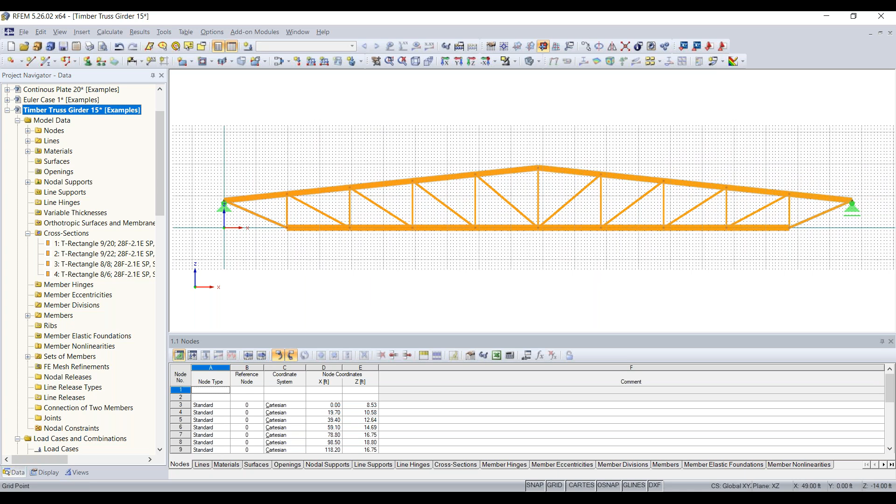The final question: is it possible to create tapered members for the RFEM structure? I think that's worthwhile showing as an example. Again, no need to do it, but you can set the member start and member end as different cross sections. So to create a tapered cross section or member...

Easiest way to show this is I'm just going to edit one of these real quick. And that's kind of where the member end comes into play. So let's say you wanted to taper this member from the start, and you wanted it to start at 9 by 20 inches or whatever, and then you wanted it to go to, I don't know, 5 by 10 or something, you would just make the member end something smaller.

Just as an example, if I change this to 8 by 8 and click OK, you can see that RFEM will interpolate the start to the end, and that's how you can taper your members like that.

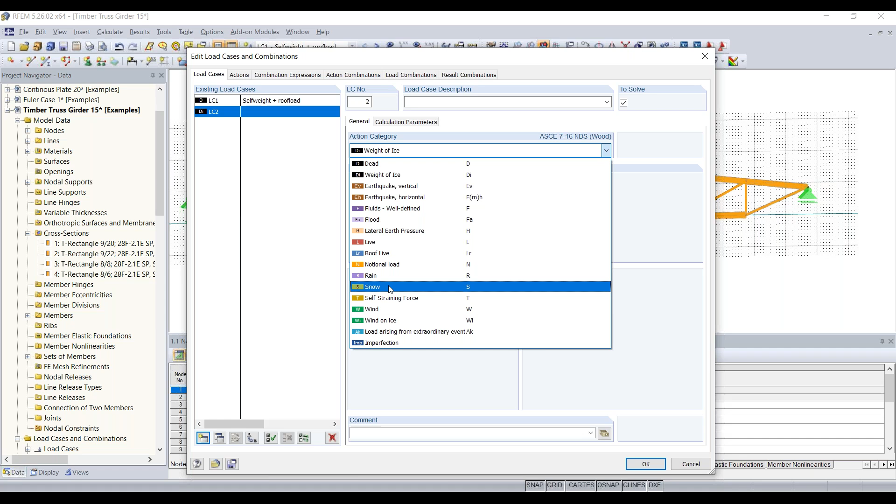So we have our dead load case, and then we can go down here to this button, create new load case, and make the action category for this one snow. This is going to be a snow load, and this snow load is only going to be applied to the left side of our truss.

Then we can create another one - this is going to be another snow load for the right side. And then we'll create a fourth load case, and this one will be wind on the suction side - actually going to make this wind uplift, and change our action category to wind.

So now we have all of our load cases created. I just want to show you the rest of these tabs. The next tab is our actions tab, and you can see our multiple actions listed: dead, snow, and wind. If I click on snow, you can see by default it's set to alternatively, which means the two snow loads will never be placed into the same load combination. This means I need to activate the option simultaneously, since both snow loads will be acting together on the left and right hand sides.

You can then see in the next tab, combination expressions, we have our LRFD and ASD combination expressions. And if I click on this 'i' button here called info about design situation, we can take a look at our design situation based on the code you have selected. This will tell you what the design situation looks like along with the parameters.

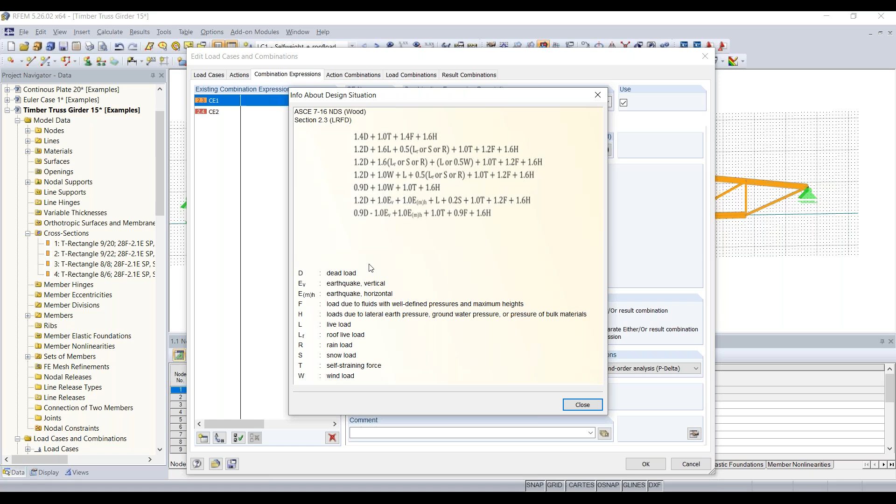And then we can take a look at our action combinations, and also the next tab is our load combinations. This is where basically multiple load cases are going to be combined into a larger load case, essentially with or without factors applied to them. So we have this base generated based on our design situation and the standard. For example, this first combination is just 1.4 times our dead load.

And so the last tab is our result combinations. Also, again, just to reiterate, load cases are calculated on a first order analysis, and the load combinations are all by default calculated based on a second order analysis.

For the result combinations, these are envelope solutions that summarize the maximum and minimum results from all of the load combinations included in them. So for this first result combination we have all of our LRFD combinations, or ultimate limit state design, and then our serviceability limit state, or ASD combinations, summed into this second result combination. This combines the results, so you could create result combinations without having to rerun results if you needed to.

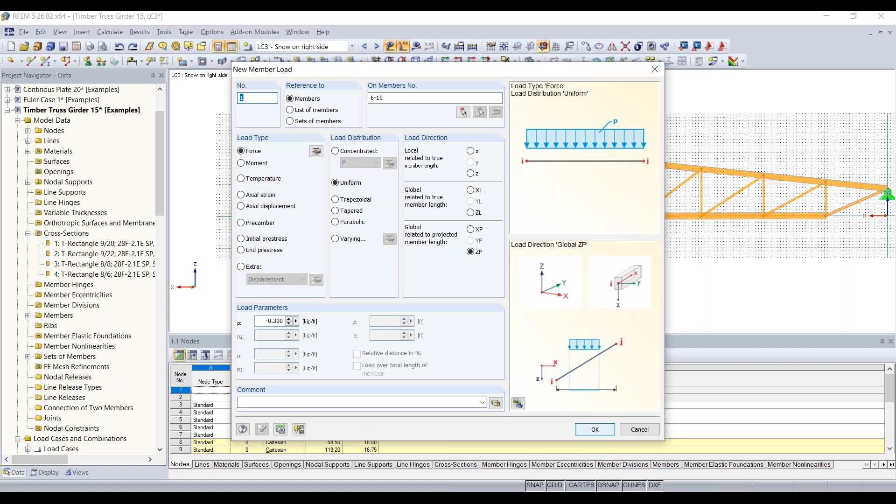Since we already selected the members before we went into the tool, everything will stay the same, so if I click OK, we applied our load. Actually, I applied it to the wrong load case, so Control Z is your friend. We can go to the next load case and just redo that real quick for our snow load on the right-hand side. There we go, now we have our snow load for the right-hand side.

Now all we need to do is add in the uplift. Again, we're going to use the new member load tool, and the thing we need to change for this is the load direction. We want this to be according to the local true member length and the local z direction, so you can see that lowercase letter. We're going to make this negative 0.035, or 35 pounds per foot, and click OK. We also need to change the reference to set of members so we can select our upper chord, and then click OK. Now we have our wind uplift taken into account.

So I'm going to run the calculation now. I'll click Calculate All.

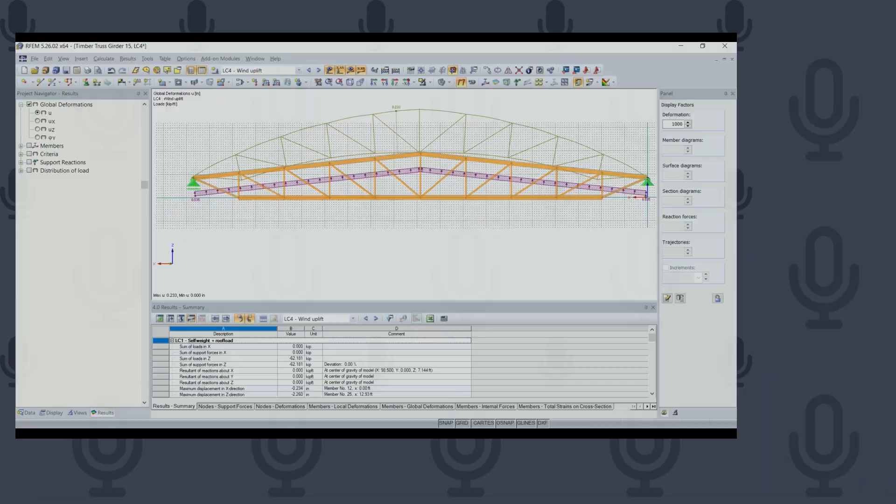This is the most efficient way to model a truss system in RFEM instead of doing it manually. So we can go back and take a look at our results that ran. Right now we're viewing the uplift load case, so you can see what our truss is doing when there's only uplift. We can change this display to show the cross sections in a colored display, so we can see those deformations a little easier. It looks like the max deformation for our uplift is 0.2 inches.

There's three major steps when evaluating your structure's results. The first step I would recommend taking is to always take a closer look at your modeling to make sure that all of your members are connected to each other.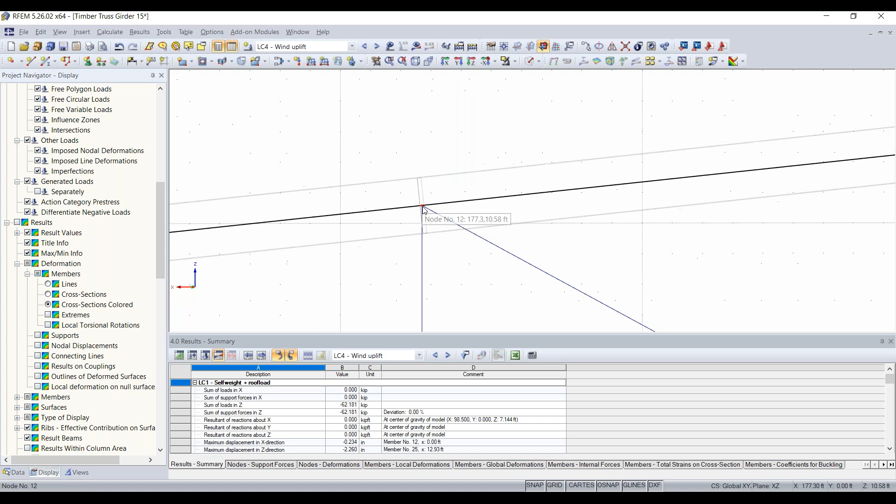This doesn't really apply too much for this model since we had RFEM generated for us, but if you have a lot of members and maybe your results aren't matching up to what you expected, I would always recommend zooming in close to all of your connections, because sometimes your connections may look from afar like they're connected when in reality maybe one of these lines is just slightly off from the node, causing a discrepancy. This mostly occurs when importing a model from AutoCAD or from Revit. Sometimes imports have unconnected members because of differences in tolerances between the two programs. So it's always important to check that.

Second step I recommend taking is to always check the deformations of your self-weight or dead load case. So if we go up to our self-weight load case and show the results, right now we're looking at the global deformations, and you can see that our deformation is symmetrical, which is good since we have a symmetrical structure here. We can just look at the Z component. This is something you would want to double check if you have a symmetric structure, is if your deformations are symmetric.

Our max deformation right now in the Z direction is 2 inches, so that's looking pretty good, as expected.

The third check is to look at your internal forces. So if we activate member results and take a look at our normal forces, you can see that our upper chord has compression forces for our normal forces, which makes sense in this layout. Then our bottom chord is blue, positive values, telling us that we have high tension forces, which also makes sense for this loading setup at the bottom here.

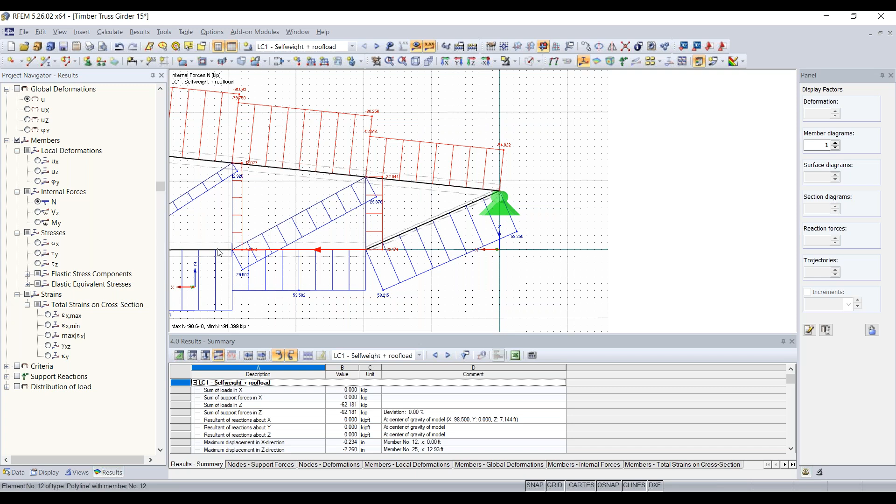You can see in the middle we have the highest tension forces of around 90 kips. You can also see that we have very high forces on our outside diagonal members here, which I did on purpose, so I can show you later how to optimize these, since these will be critical members as their cross section is a lot smaller than the main cross sections we created for our bottom chord, and they don't really compare too much in size with the bottom chord and the tension forces it's receiving.

Next we can also take a look at shear forces. These are pretty low, which is expected with a truss, since we're not really expecting too high of shear forces. Our bending moments show the same thing as shear - they're not too high, which is as expected since trusses mainly transfer forces such as tension and compression, not bending moments.

Now you can also check your support reactions. On the left-hand side, this is another great way - I can also turn off the grid down here so we can see those values easier. On the left-hand side we're getting 31 kips, and on the right-hand side we're also matching that number. So with a symmetrical structure like this, it's good to see both of those matching, which is what we would expect.

The last way to check your structure is to go down into the table down here, and we can take a look at table 4 results. You can see for the self-weight plus the roof load that we can take a look at the sum of the loads in the Z direction, and then the sum of support forces in the Z direction. Both of those values match: 62.18 kips for our sum of loads, and 62.18 kips for sum of support forces. Both should match because of statics and reactions to the loading, and you can see we're getting a deviation between those of 0%.

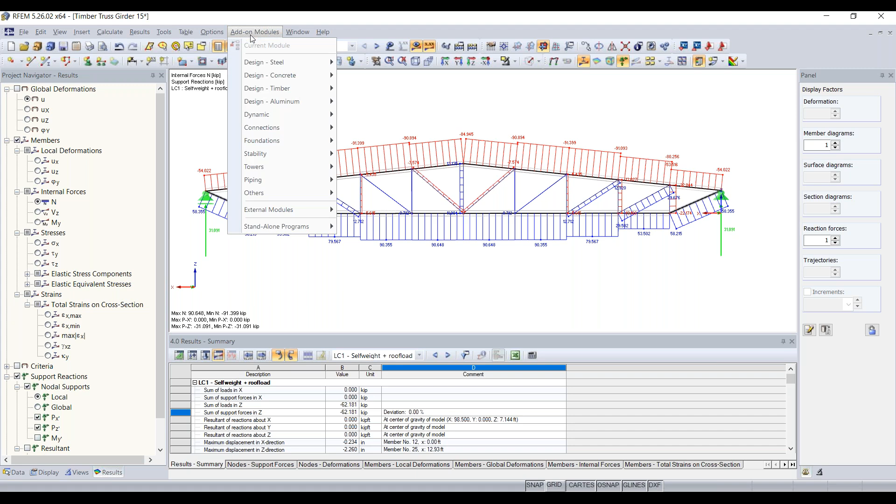Whenever we're doing a material specific design in RFEM, we want to use the add-on modules. For this example, we can go up to add-on modules, and then go to design timber. You can see we have multiple options. I'm going to design it according to the AWC, but you can also see we have the CSA for Canada, and you can also use RF Timber Pro to design according to the Euro code.

You can find these add-on modules under the data tab in the project navigator, and they're listed here. I saved RF Timber AWC in my favorites. To save something in your favorites folder for the add-on modules, you just need to right click on it and then hit favorite, and you can see it'll move it to the top here. So that's an easy way to find them. So we can just double click on RF Timber AWC in the project navigator.

For this example, we want to start off by just designing the upper and lower chords, and then we can design the diagonals and then the verticals.

So right now we're in the RF Timber AWC add-on module. This is basically how the other add-on modules are going to look. It doesn't matter too much about which standard you're using, the layout and UI is all pretty cohesive. So we have our input data on the left-hand side here.

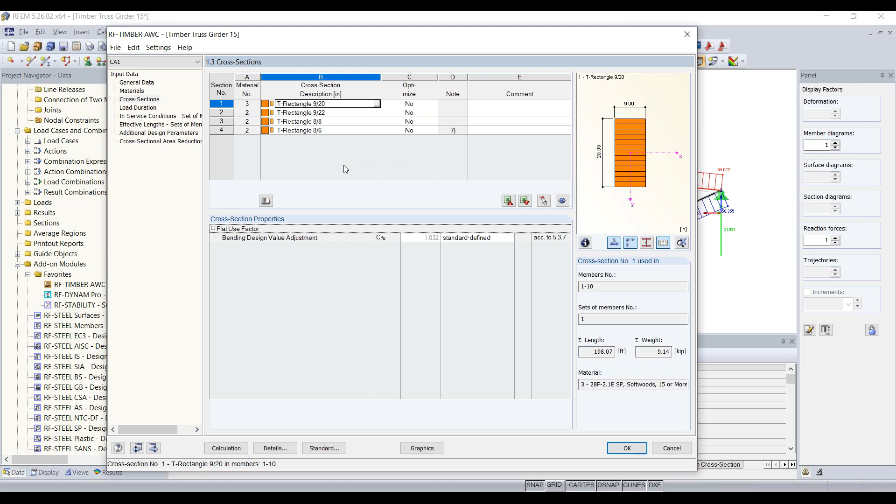For now, we're just going to leave that as is and move on to the next category, which is service condition. You can see we can either choose between dry or wet conditions, and then we can also choose the temperature at which the structure will be placed for both of these sets of members. We're going to leave that also as default as less than 100 degrees and dry conditions.

And then the next category we want to get into is the effective lengths. So for this, we're going to have to make some assumptions. This is for your stability checks, so buckling about the x-axis or the strong axis, and then we have buckling about the weak axis or the y-axis. And then we have lateral torsional buckling.

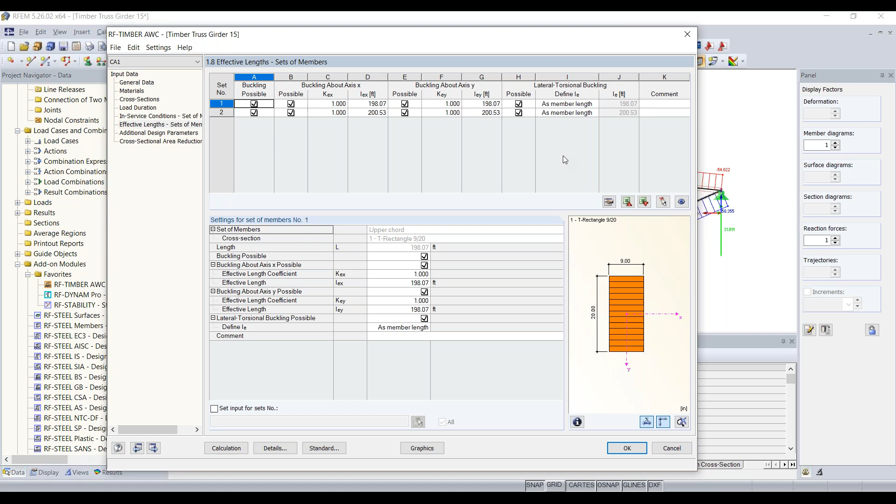So the first assumption we're going to make is that we'll have purlins connected to the top chord here, and all those purlins connected will be going out of plane. We're going to assume that they're framing into the top chord every couple of feet and that they are fixed to it. So what this means is that we do not need to consider buckling or LTB for our top chord. So we can uncheck buckling possible here, and we can uncheck the possibility for lateral torsional buckling.

Taking a look at our bottom chord here, you can see that we have no compression forces, only tension. That's what the positive values in the blue coloring are showing us. So without compression, we also do not need to consider the possibility for buckling or lateral torsional buckling, so we can uncheck those.

Another way of doing that would just be to go to the details option here, and then under stability, we could uncheck perform stability analysis. So either way works for that.

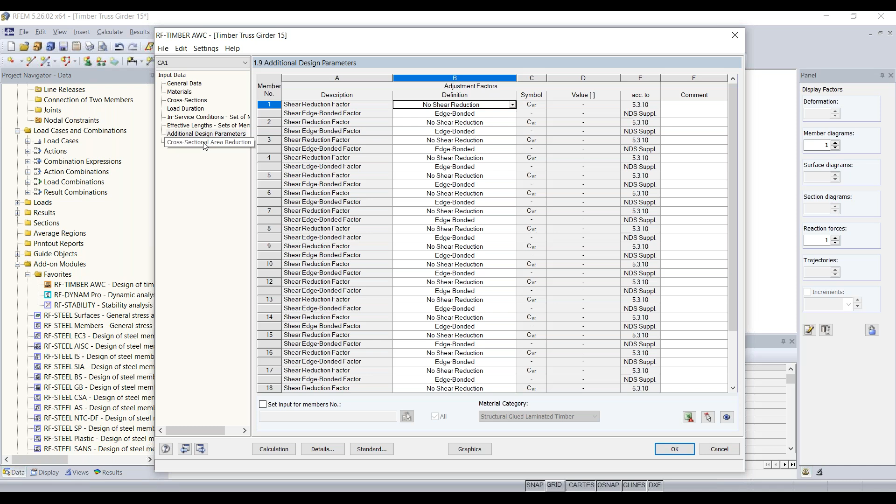And now we have all of our parameters. There's also some additional design parameters here. So right now by default, we're taking into account there's no shear reduction and we have edge bonding. So if you needed to change any of these, maybe you have no edge bonding and you have an odd number of laminations or an even number. And if you want to take shear reduction into consideration, we also have that option. Under cross-sectional area reduction, we don't need to worry about this either for this example. We'll leave that as is.

And now we can run our calculation. And before we take a look at our results, I have another question.

So a statement really, if you could answer true or false, and then we'll go over the correct answer.

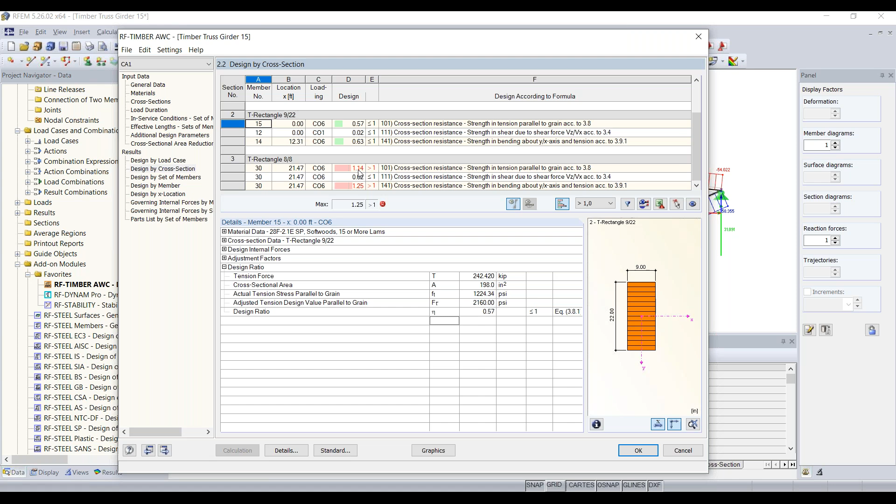I now have my results here on the left-hand side, and you can see we can filter by load case, we can filter by cross-section, we can filter by just set of members. You can see when I'm filtering just by a set of members that our lower chord is failing, and I think you might be able to guess why. If we go to cross-section and take a look at our cross-sections, they all look good, except for our 8x8 diagonals here, which are exceeding our design ratio of 1.0 for bending and tension.

This is kind of what we expected since we saw those high compression forces or tension forces, and this is a pretty small cross section.

So we can go through details such as material data or characteristics. We can look at cross-section data here, and we can also go through design and internal forces.

You can see here we have a normal force, and in our cross-section a max of 157 kips, and also some bending moment of 3 kip per foot.

According to the AWC design, we can take a look at our adjustment factors, and we also very nicely have listed our references to the code here, where we reference the code to come up with these factors. So if you ever needed to double check any of these, it's great to have those code references. That's for tension stresses, and then our bending stress adjustment factors here.

Then we have our design ratio. This basically goes through and shows you the factors and parameters that go into coming up with the final design ratio. And again, we have some code checks down here showing which equations we're using as well, so it's always good to know that.

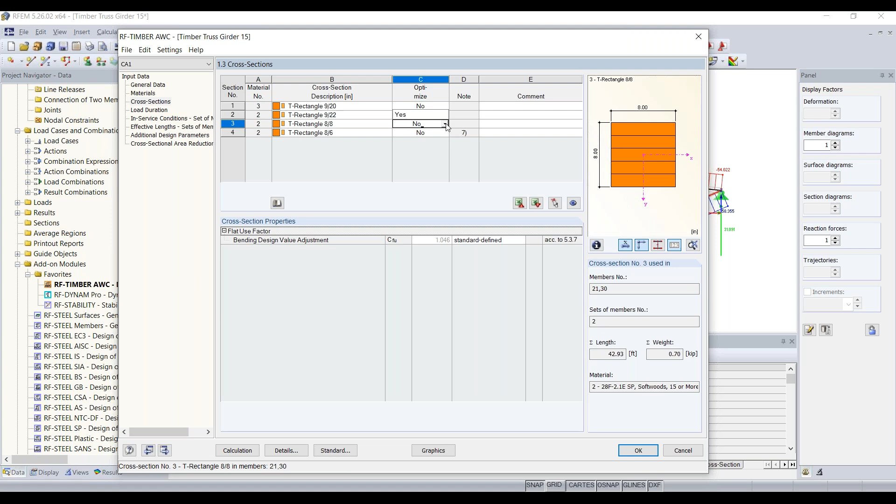It's going to delete our results, which is fine for now. Now we want to go to cross sections, and then go to our rectangular cross section, our 8x8 diagonal here that was failing. What we can do is under optimize, click on the cell and then click on the arrow, and set this to yes.

Then this box will come up and we can choose to optimize our base and height. So we'll choose base and height, and then we can choose this option down here, keep current side proportions. So the ratio between base and height, if we choose this option, will stay the same, which is nice.

Minimum doesn't really matter since we're exceeding our design ratio, so we'll just set that to 8. Maximum we'll set to a whole number of 17. And then increments we'll set to 1 inch increments to increase or decrease by. You can set this to what you prefer, but this works out here, so we can hit OK.

And now all we need to do is hit calculate. Then you'll see that we are now meeting our max design ratio, so all of our cross sections here are passing. Our max design ratio now is 0.79 instead of above 1.

We go to design by cross section and scroll down to our diagonals. Now they are optimized to a 10 by 10, and the max for those is only 0.79.

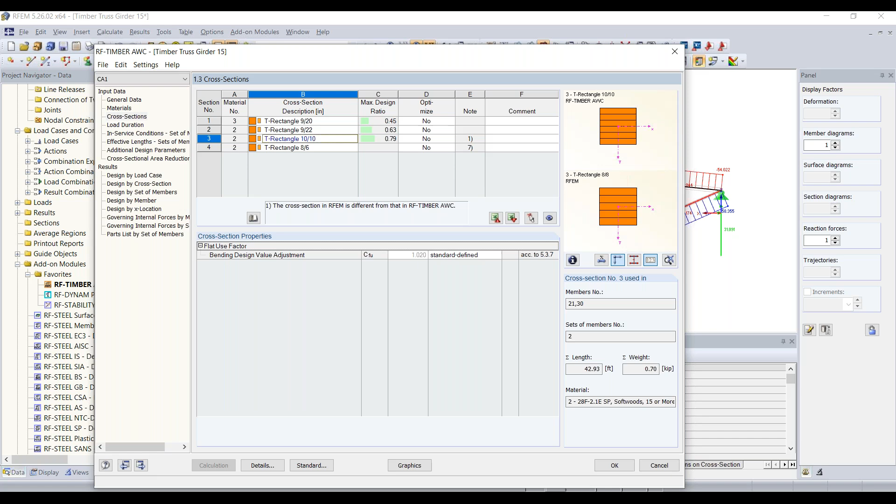And then we can just hit recalculate, and the results will look the same, but now the cross section in RFEM is actually changed. So that's how you go about optimizing cross sections using the add-on module.

Now what we can do is go up to File and Rename, and we can have multiple cases. So this case we'll just call the upper plus lower chords. And what we can do is create a new case, and we can design all of our diagonals.

And we'll save our changes. What we want to do again is uncheck, because we don't want to design all of our members, we just want to design the diagonals. So what we can do is hit this button to select them graphically.

An easy way of selecting all of them graphically instead of clicking each one is to use this tool called Select Special. This is handy if you have a large model and need to select all of the same cross-section within a model. You can hit this Activate Members.

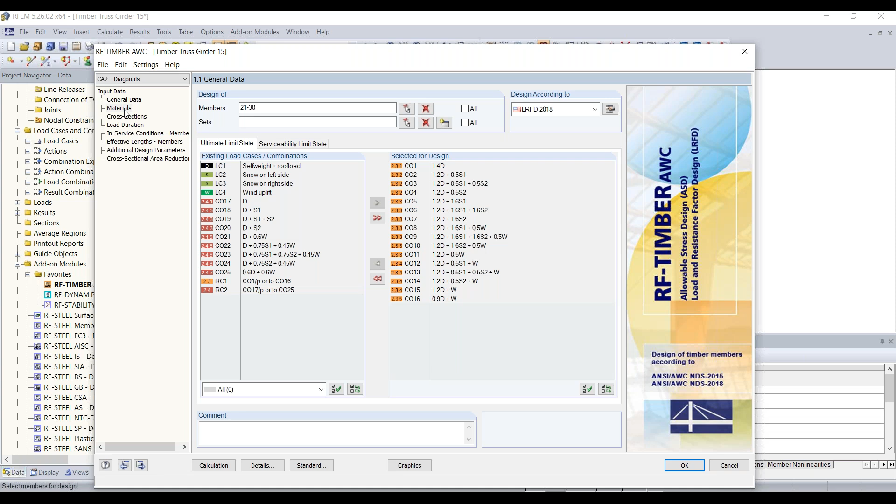So what we can do is select all of them, move over to our combinations, and then choose design according to - go through our materials, cross sections look good, load durations, and service conditions will leave the same.

And then for the effective lengths for all of these diagonals, this is where we would leave all of them as the full member length, since they could possibly be experiencing buckling or lateral torsional buckling.

And then also, additional design parameters will leave the same. So then we can run our calculation.

Now you can see that we have our max design ratio of 0.82. So if you're curious which one is the max, which combination is causing the highest design ratio, we can filter over here to max and hit apply filter.

And now you can see that bending and tension is what's causing it, and combination 6 here and member 30 is causing our highest design ratio. So good to know.

And if I click on the member here, this red arrow is showing me which member is giving us the highest design ratio, or our critical member basically.

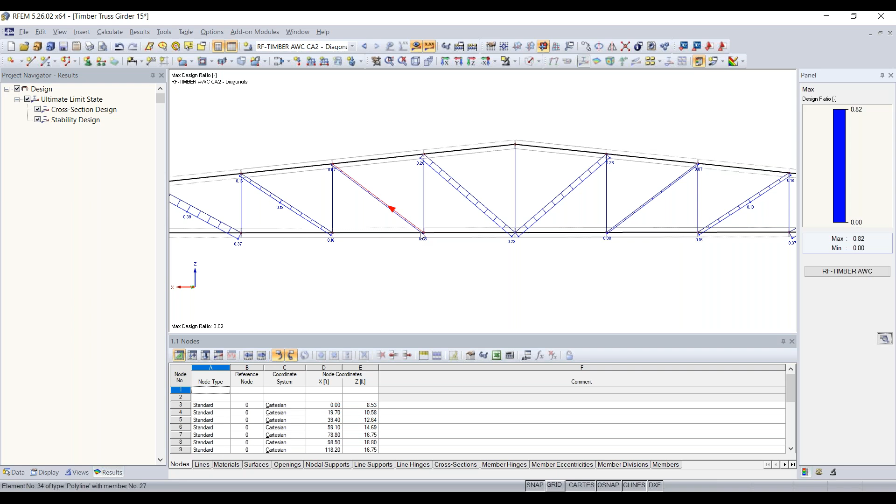So these diagonals in the center here are fine, we don't have to worry about those at all. We could, if we wanted to, increase or decrease those cross sections. And we can go back.

And then we can create a new case and design our verticals. Again, uncheck all graphically and use our Select Special tool here.

Actually, I forgot to - oh no, I lost my window. So I lost my select member window, not sure what happened to that. So let's see if we save. And we'll just save all.

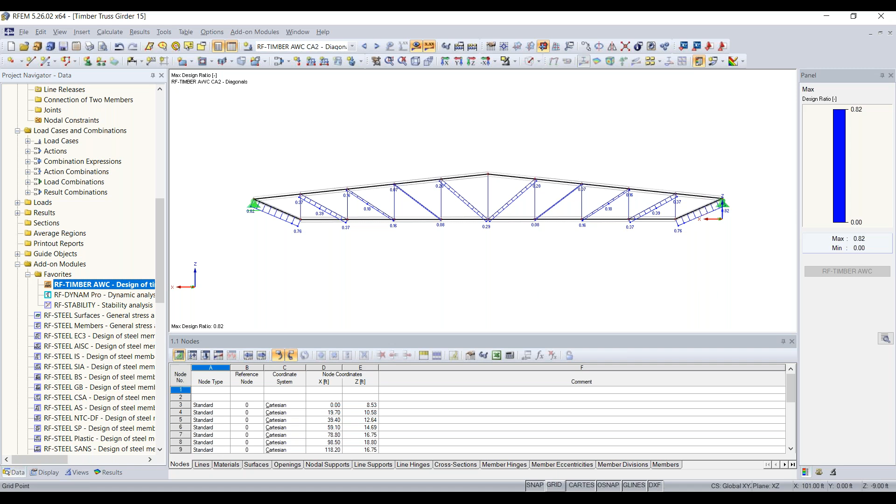The only question that came in was the ability to analyze shotcrete. I had answered in the chat, but just to clarify, realistically if there doesn't exist a material in the program, you can always add a user-defined material. So as long as you have those properties, you can essentially copy the existing concrete material and add in the shotcrete material properties, then the full analysis can be completed.

I don't know about the specific standard you're referring to for concrete design and if it addresses a material like this. I know the ACI standard and CSA standard for North America don't address this. So the design modules are based on typical concrete materials, which are also listed within the program. But again, it's always possible to analyze any material within RFEM as long as you have the relevant material properties.